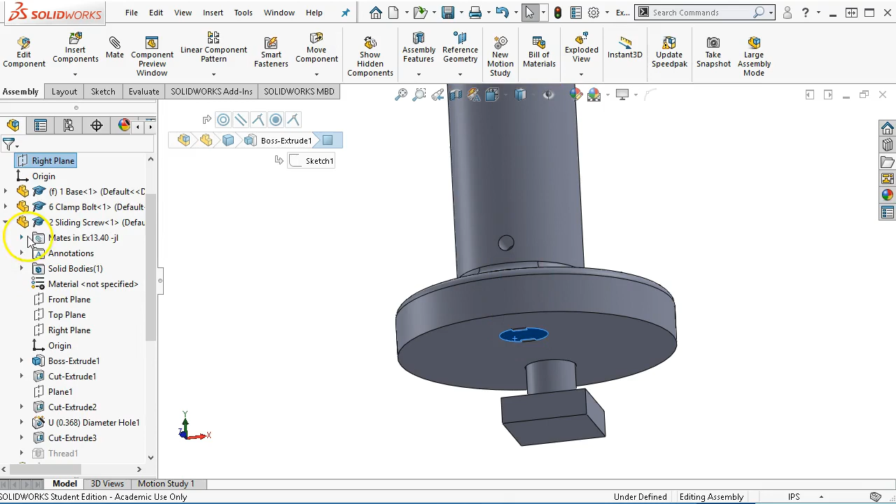Okay, continuing the mill jack. I did kind of see where this would come down and it would contact on the threads and wouldn't really come back any further. So one of the things that we could do, since we located for that geometry, is when I highlight the sliding screw and go back to the mates, there's a coincident.

If I right click and edit that feature, then the other mate would be to go to a distance, and we'll raise it up 1/8 of an inch. I'm going to go to the high side, rounding up. Notice that it went down, so I need to flip the dimension. I wouldn't want to reverse the mate alignment because that would turn the piece potentially upside down and conflict with some of the other mates.

So that puts it at the top of the part, so we could still drive that piece down, but the anvil isn't going to come any lower than the knurled nut. Okay, and I go ahead and hit OK. The piece that I forgot was that little pad, and so we need to look at a strategy to make it. The pad's going to line up and be clocked to the notch, so it's given as half an inch tall, 3/8 wide, and then no real depth called out specifically.

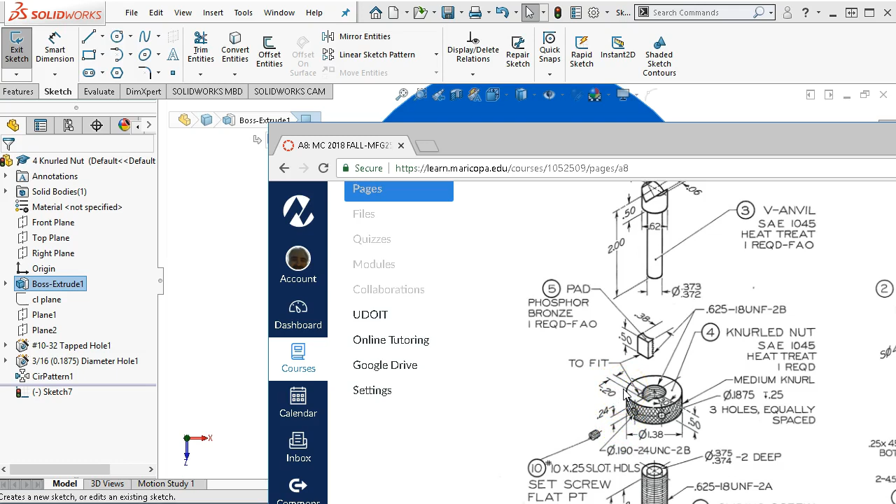What do we have there? 0.2. So they gave the 30 degrees off the horizontal. Yeah, 0.2 looks like the depth. And then they're going to say match or to fit. All right, so open up the sketch. Typically that midpoint is going to be coincident. Then select the midpoint of the rectangle, it'll be vertical. And then we're going to be 0.5 by 200 thousandths.

So the problem that I see with doing that is not knowing what they used as the reference. The threads that are going to engage on that pad, we're not going to have a lot of engagement left on that side. So we still have to get the threads in, and I'm still kind of wondering how I'd make that, getting the threads to line up. I know there's going to be some up and down float. It's not constrained that way. It's almost one of those where you would have to make a block and then EDM out the notch and have it pretty much fall out.

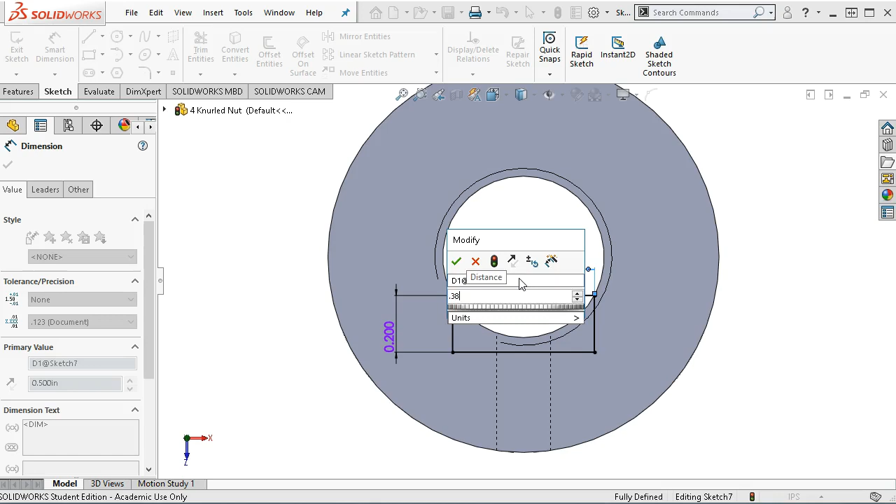So, oh, 1/8 inch, or sorry, the width was 0.38. The height was half an inch. Okay, so that makes sense. I'm going to extrude cut, and then go through all, and hit OK. Alright, so my cosmetic thread still lines up there. And we'll save. I'm going to wait for the knurl a little bit longer. Alright, let's see what we can do with the pad.

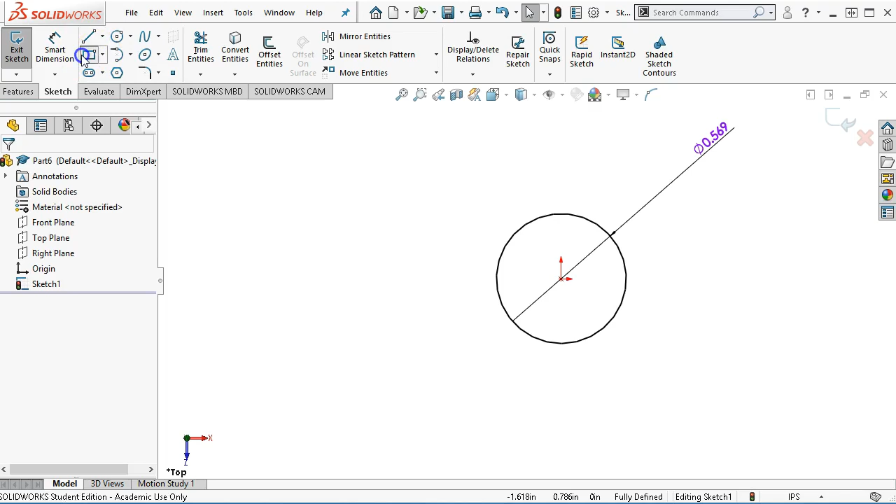We'll set up that geometry on the minor diameter. Okay, so on the top plane, open up the sketch. Let's just do the math again, minus 1 divided by 18, so the 0.569, that's my base circle. We brought the 200 thousandths out from that point. So I'm just going to generate the same type of geometry. Select the midpoint, make it vertical to the origin. 3/8 and 0.2.

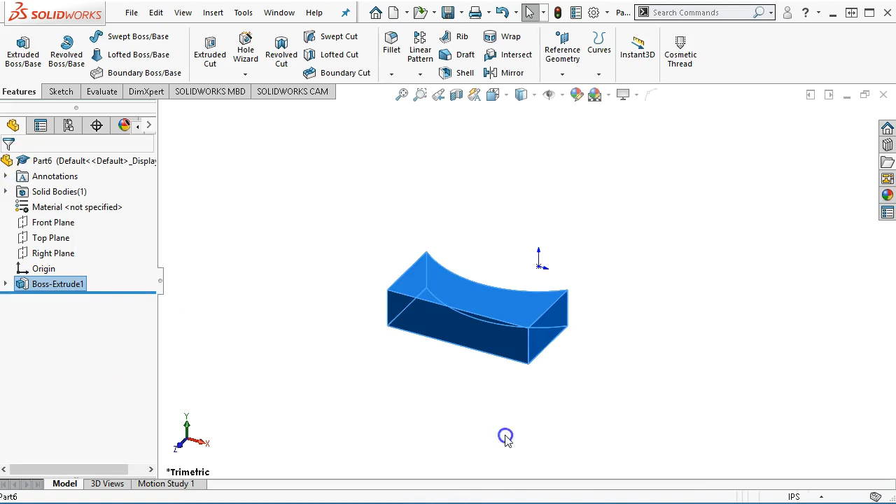Alright, so if we use that, I don't know if I can reproduce, oh, we jumped out of it. Let's go ahead and extrude. I'm just going to extrude that region. I don't really like leaving sketch 1 in there, so let me go ahead and get rid of that. Oh, and it was at 100 thousandths, so let's identify it and go 0.5 and rebuild. Okay. So if I go back and show that sketch, we're going to see if we can use that as the base circle of our helix.

So to make a swept cut, now the question would be, can I do a cosmetic thread on this? But I do want to see if it'll make the swept cut. In this case, I don't know that the threads would be an option. I don't know if the annotations are an option. So let's go ahead and go through this process, even though it's partial. All right. So to make a swept cut, we need a curve. We need the helix.

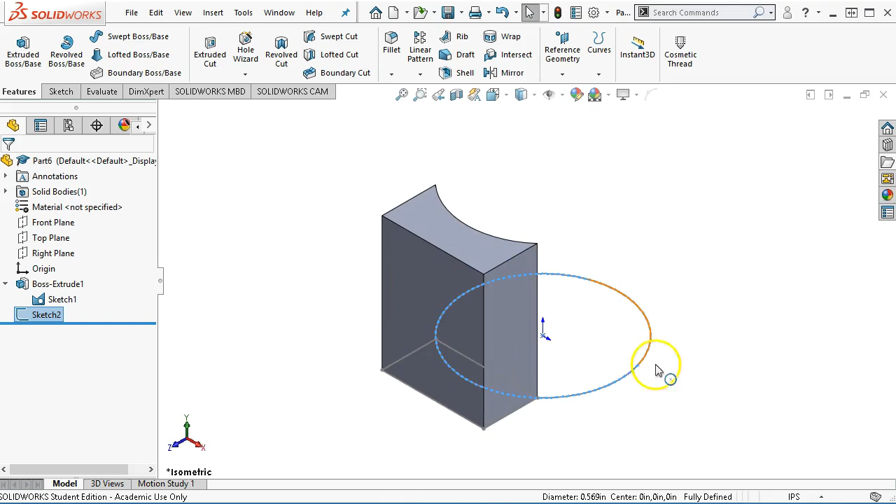And then since it's not a unique or a dedicated circle, we need to convert that geometry in. Alright, now it has its very own sketch. So sketch 2 will be the base of the helix and spiral for the curve. And we were doing 1 divided by 18 as the pitch, 0.055. And I don't really need to take it out that many.

I'm just going to go to 0.056 as a rounding, because that'll help a little bit with the angle. And so with the threaded cuts, number of revolutions, well, I don't really like that one. Let's go height and pitch.

Alright, so we have the pitch at 0.056, the height for one revolution, but let's go 0.5, and then we'll overrun it by 60 thousandths. So that'll make sure that it clears. And then the start angle at 0 degrees, we'll be able to pick that up and go ahead and accept.

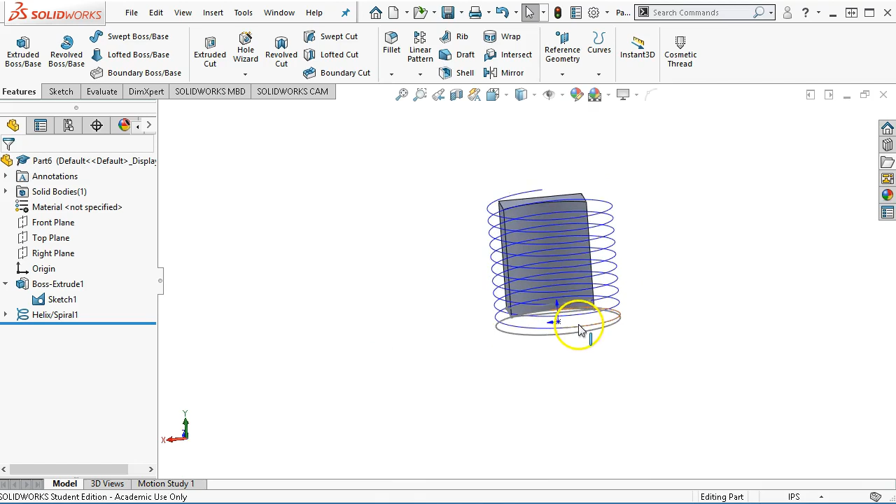Alright, so now the trick is to find 0 degrees. So it came back around and it's here, and that helps with it being internal to the geometry. So keep in mind that the wall has the curvature on it. Let's see if I can do the right plane. Okay, so on the right plane, we're going to create a triangle, 60 degrees sharp. That one horizontal and for construction.

Alright, and then our choices are to go to the top and pierce it to the curve, go to the middle and pierce it to the curve, or go to the bottom and pierce it to the curve. One of those will work, and by overrunning it, it really won't matter. My preference is going to be to pick the middle. And then that's the endpoint, so we get a coincident.

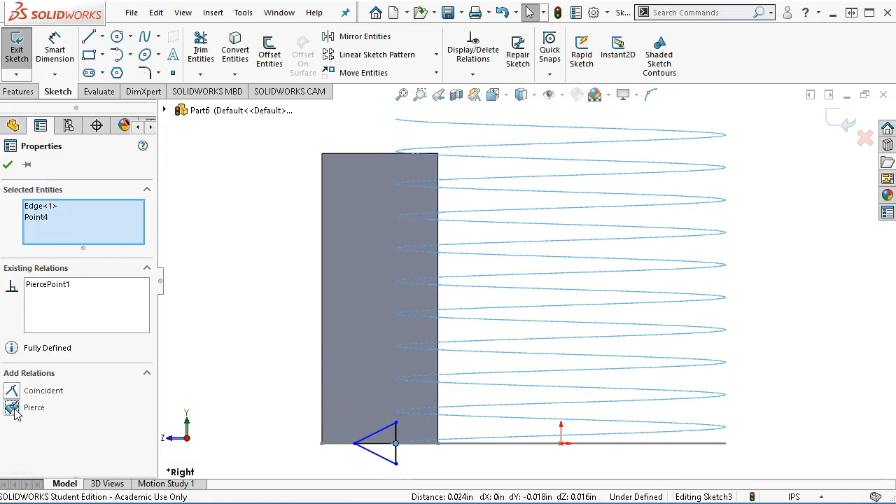But coincident typically will say that that point can ride anywhere on this curve. If we pick the curve and the point, then we go into pierce. Alright, so got it in position, going to give it the 60 degrees for the V, and then the height will be 0.055. I don't want it to overlap.

And let's see, what did I tell? Oh yeah. So pretty much the next V is going to be just a little bit of a gap from this V because we're at the midpoints. So let's go back and select. And then of course with the truncated threads and everything, we have just a little bit of a difference with the angle. Alright, so I just wanted to see what that value calculates out as.

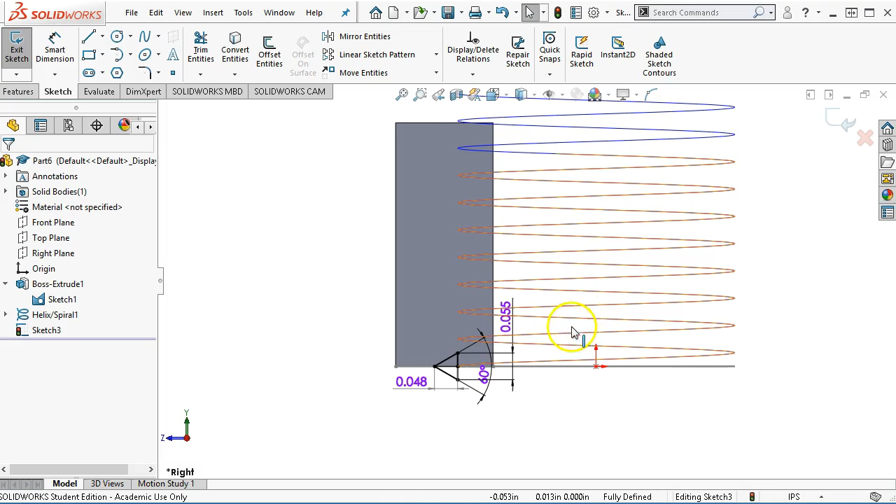So with the root radius and the crest and everything else, the threads get really interesting if we go to fully create that geometry. Alright, so we have a sketch that is the profile, our sharp V thread. We have a helix that is the path. And if I select both of those, then they become the swept cut. So it's going to remove the material going through the part.

And even though there's nothing out here to cut, there is something. I'm not sure what that is. That's a little concerning. Let's go ahead and accept it and see what it does. Interesting. So it chopped something out of the bottom, and some little notches. I haven't seen a swept cut do that. Alright, so we'll save that one for later. That's the technique. I will explore why exactly it did that.

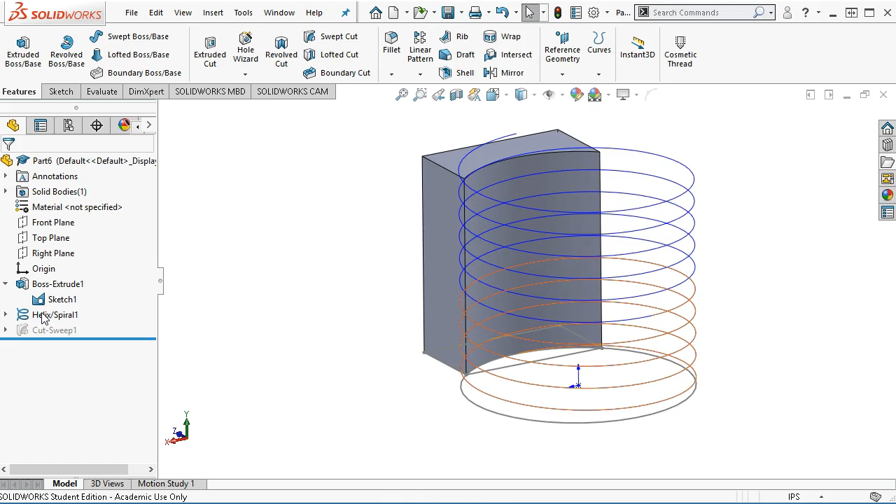I'm going to suppress it. We're going to hide the helix. And as the complex, we can hide our base sketch. Alright, and let's just see if it'll put the cosmetic thread on a curved edge, 5/8-18. And it has the geometry, so it shows there. We go to the one, not really there, not really there. So that's kind of interesting.

What that's going to do as far as the callout. So this was item 5, the pad. Alright, so at this point I think we could have just drawn that, and we'll put a note on the drawing, 5/8-18 thread, and then see what it does. Alright, so let's go over, I'm going to launch my File Explorer. There we go. And then we're going to go to the assignments.

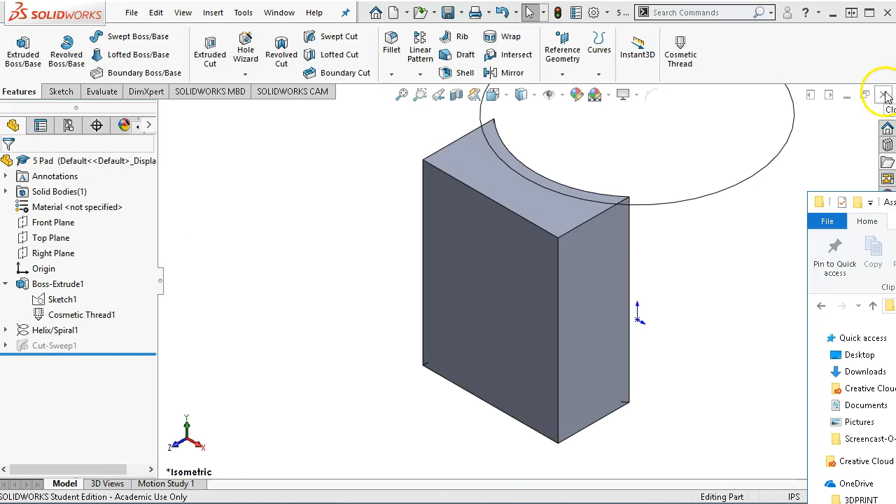Alright, so when I close this, there is number 5, the pad. We still have that open, but I think we're through with it for now. And it's saying the assembly has changed. So I'm going to rotate around to where I can see that notch, and then we're going to drag the pad in. And that produces kind of the same insert components as coming over to the SOLIDWORKS Explorer and picking those items out. Alright, so the annotations aren't being shown.

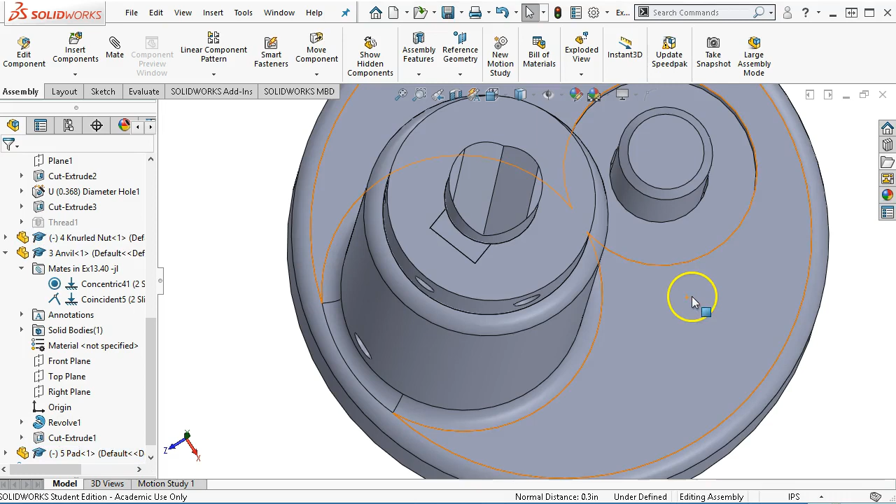So the other thing would be, I'd almost want to make this like 7/16 tall, because that gives it one thread higher or lower so that it wouldn't be in bind if we went to the trouble of making this. And so that's coincident. And I can see the top. And so I don't know how much mismatch they were really counting on for that piece, but I would think that I'd want maybe even half a pitch so it would not have to worry about alignment.

The other choice would just be to bring this to a higher class of fit, go to a 3B. I think maybe the 3B tap, or even as small as these parts are, cutting the threads to a 3A and a 3B fit so that you have that resistance in the turn would be about as easy as making this little pad piece. So that is certainly an option that we would put on the table.

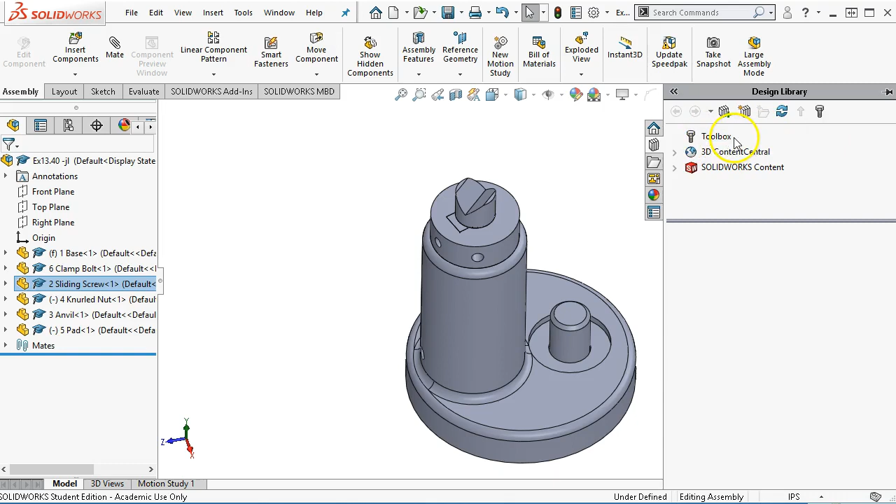Alright, so that takes care of the parts and the oversights. In our process of building parts and assemblies, we're always doing that error checking. It's kind of a continuing process of what did I overlook, what did I potentially miss. We're ready to go on to the toolbox. So I'm going in the library. Toolbox isn't active. Toolbox only works in the assembly.

So I'm going to go ahead and add it in now, which is the same as coming up to the options in the add-ins and telling it to load the toolbox. Once I do that, the design library is going to have all of these folders. Under ANSI inch, we're going to look for the washers first. Let's just go with plain type A, and we're looking for what would be an off-the-shelf. Preferred narrow, preferred wide. No, I'm just going to pick one.

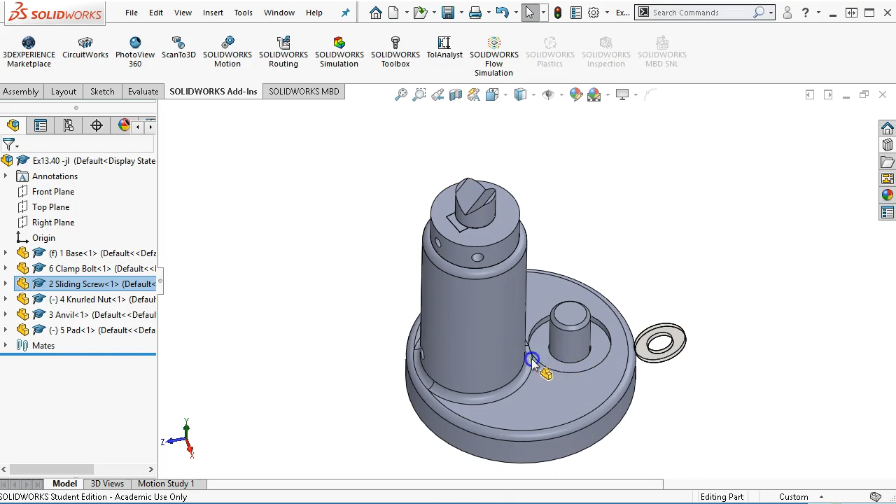So the first one, kind of dragging to that area. No matching size for the component. It shows it as a 5/8, which is fine. So this one is a little bit bigger. It did go to the 0.66, but it is really tight to that edge. So this would be a good time to fly the browser back in, and I'm going to go out to McMaster,

and we're going to look for washers, standard. Doesn't really need to be anything special, so standard flat washer, general purpose. Probably would stay with the 18-8 stainless as a pretty much generic all-around. Right, and then 5/8, 1.5 inches.

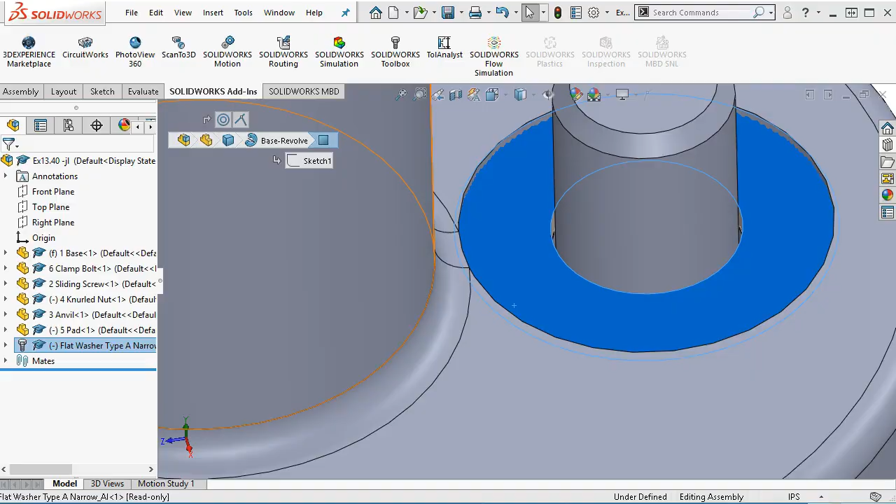So that may have been the purpose of them making their own washer, to reduce that size. A standard 3/16, 1.25 inches, that would probably fit a little bit better. And then 50 to 60 thousandths or 55 to 70 thousandths on thickness, and not rated on hardness. Alright, so that gives us a range. Let's Control Z, and then remove the washer, and go ahead and save one more time while I'm thinking about it.

So narrow flat. Let's see if that's going to be any closer. Nope. And then, let's see, that's a wide flat. Nope, not helping. So the narrow is probably the better bet, and the piece is not going to quite fit with our design. Okay, so that being the case, we're not exactly finding what we want.

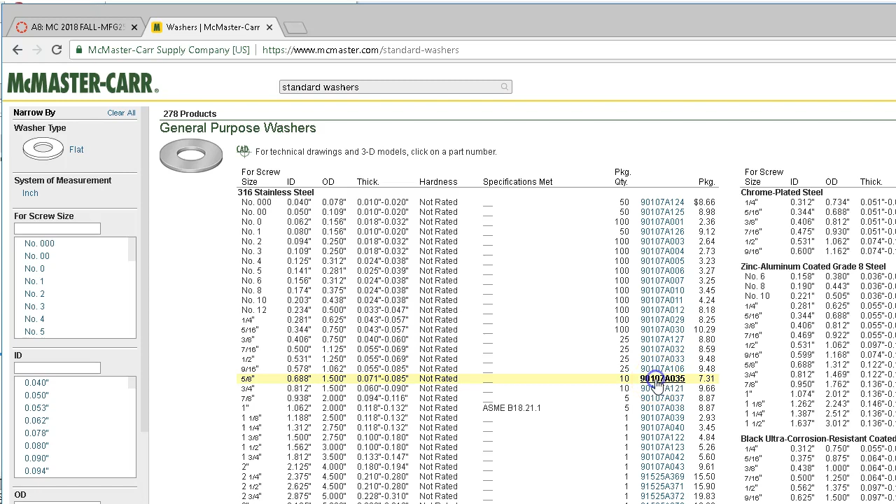The advantage to companies like McMaster and other suppliers is that if they provide you with a model, it's going to have their part number attached to it. It goes into your assembly. More than likely, you're going to order it from them. So, 70 cents a piece for the washer. I click on the part number, I go to its detail. We have the description. So that one did go up to 1.5 too. I thought I had the 1.25.

Oops, wrong one. Needed to hit back. See what I was not paying attention to. 316. No, they were both 1.5. I must have jumped down. Alright, so that gives us a choice. Since the other washer was pretty close, now all the 5/8 are looking like they're, well, there's a 5/16, but that's still an issue because we drew it at 1.282.

Alright, so going back into the model, let's see if we can fit 1.5 inches in there, since our supplier and most of the suppliers are going to have that standard size. Since I drew this in the base sketch, we'll come back and see what kind of problem this generates. So 1.5, let's get that out of the way so I'm looking at it. There we go. If we add the other 1/8, actually it needs a little bit of clearance, so let's see what it looks like at 1.53.

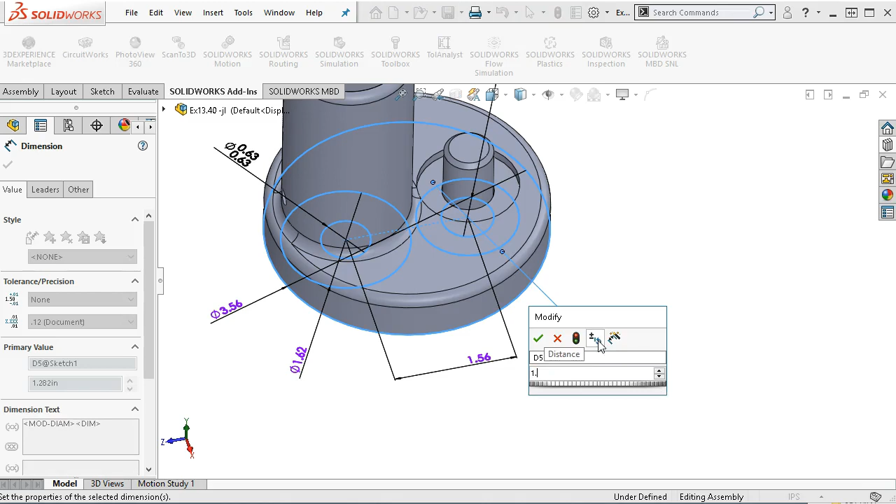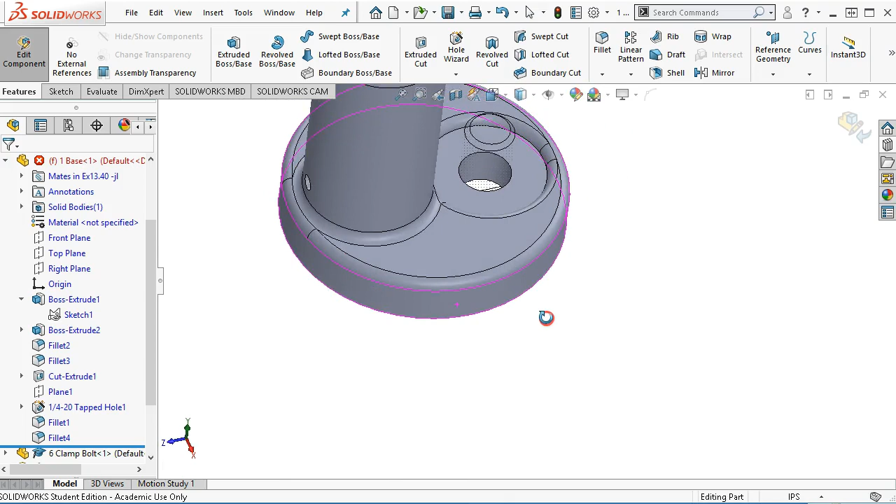And we'll see what that does to the fillet. Yeah, it's kind of what I suspected, the fillet was going to have some issues. If I edit the fillet from the assembly, I'm editing in context. I do want to be careful not to tie anything together that I don't want tied together. If it terminates at that point, then we'll see if that's okay. If the FeatureXpert can resolve it into 2, or something about that cylinder intersecting, though, that's a little weird. Yeah, I guess there is an overlap there then.

Alright, so I'm going to go ahead and edit the part, opening the part. Oh, I put the fillet all the way around. Nice. Yeah, that was not a desired result. So I'm going to go ahead and just delete the fillet out of there. We need to look at that base sketch. Alright, so bumping it up to 1.56 gives it an overlap, and that's cutting into the face, or the 1.53.

So if I go to 1.5, that could be a 0 thickness, which would be a problem. And we have enough room, and it depends on what we're changing here. If this is a new product, then I can make the change. If this is an existing product and we're reverse engineering or reproducing it for another production run, then I pretty much don't want to change that value, and I then have to decide if I'm going to make that washer at 1 1/4 to match up to the 1.28.

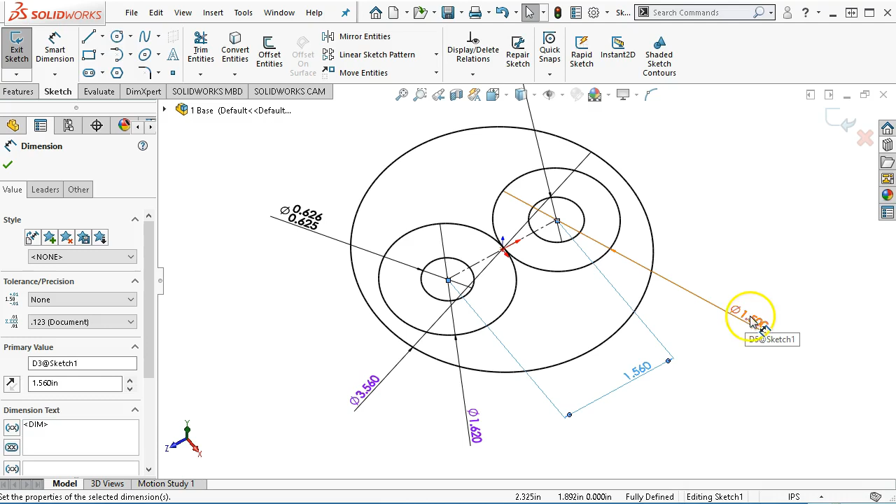Let's go ahead and see what it does. And then we'll hit close, and there's another fillet in there. So that one kind of comes around. Oh, it added fillets earlier in the mix. Alright, so I'm kind of okay with doing that. And then where was fillet 3? So I'm just going to edit the feature. Okay, so fillet 3 was along the edge. That was one that we didn't need. So that one just gets deleted.

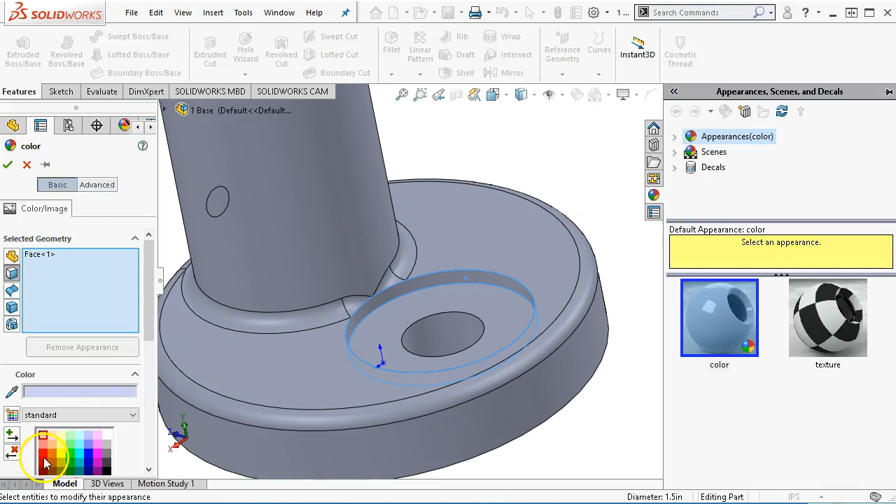Alright, so this is a design review item that I'm going to want to mark by the appearance. So we're just going to do the face. And I may not be able to see it as well in the assembly, but we are a little deeper than the other part.

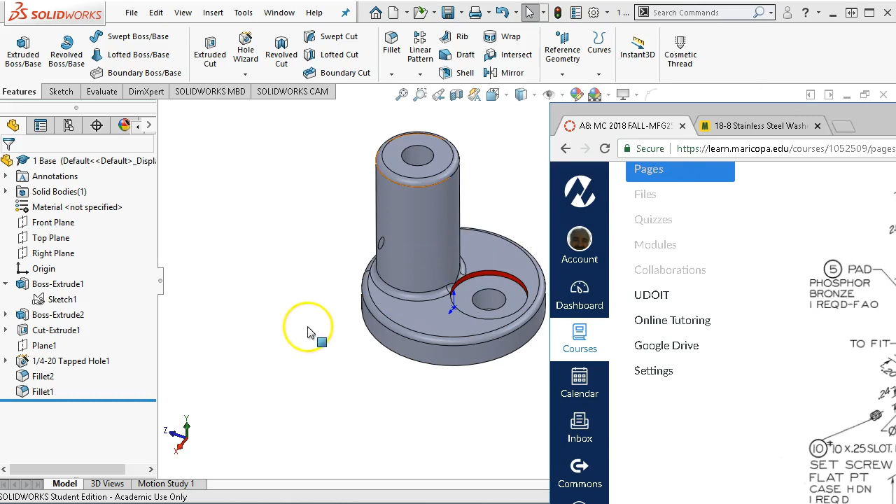Alright, so then what I was going to get at is if I could find the washer in the supplier, then clicking on that item. It doesn't matter, then the 18-8's fine. Clicking on that item, going to its detail, and then coming over, we can download the 3D SolidWorks, save that file, put it over into our working folder or into our design library, and be able to drag and drop it in just like we were doing the Toolbox items. Alright, so I can go ahead and close that.

And I'm going to leave the fillets a little weird. We're going to go back to the preferred, put that in place. It is 5/8. Oh, and we do end up with a little bit of clearance, so what did I tell it to do? Alright, so its size is 1.31. Alright, so that actually helps. The narrow was pretty good, so let's go back to the original sketch. And I am editing, making these changes outside of the... so 1 3/8. Problem here is still going to be that being undersized. Yeah, I don't think I want to do that. Oh, and then I put the wrong number in.

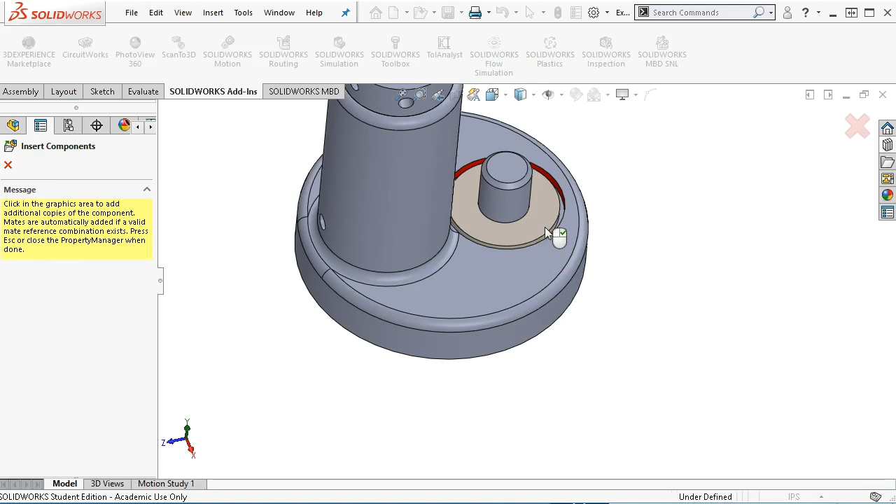Alright, so I don't want to do the narrow preferred because we're going to have to go look for it. It's not an easily obtainable item, so let's try again with the select. It's going to be for 5/8. And it wants to continue putting washers in. So that one's 1 3/8, that's a little bigger. Alright, and then that one was huge and that one was huge, so let's see, 1.5. Alright, so that being the case, let's go ahead and download.

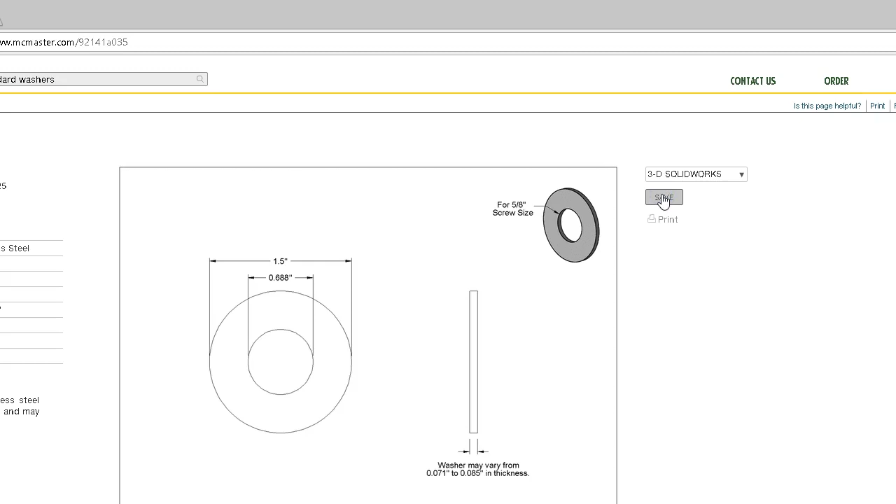Alright, so save the 3D SolidWorks file. It puts it over into my downloads. Oh, hopefully it put it in my downloads. Did it finish? Okay, there it goes. Apparently I didn't get it clicked. Let's expand out for the assignments. I'm going to drag it directly into Assign8. If this was a common part that we were going to work with, then I would probably add it to the design library. Alright, so I'm going to drag this in.

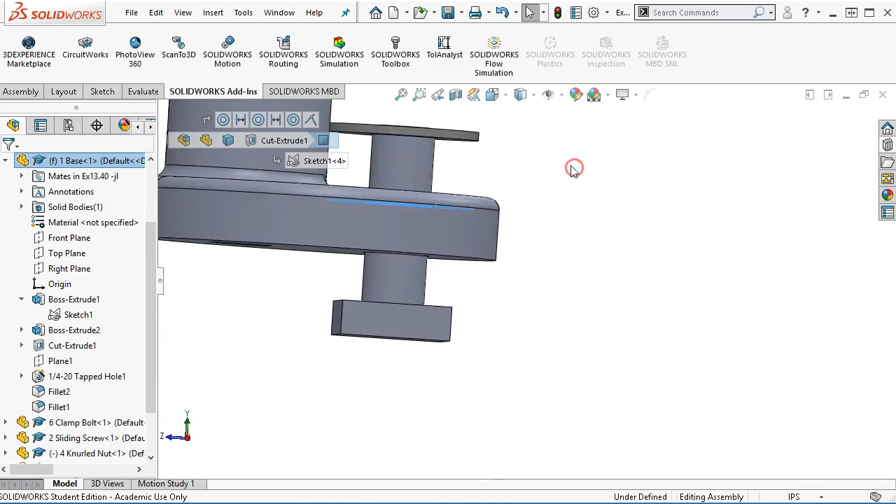Well, I don't have a mate reference, so we're going to go concentric, and then rotate over. So just kind of left click and hold down, move it out of my way, and then we'll go coincident. I really don't care if it rotates or not, but I'm going to go ahead with that concentric and right click, and it's only the concentrics that you can right click and tell it to lock the rotation. Alright. So that looks pretty good, maybe not perfect, but I still want to bring that up in design review that hey, there's an issue here, or who's our supplier, what are they going to be able to get us.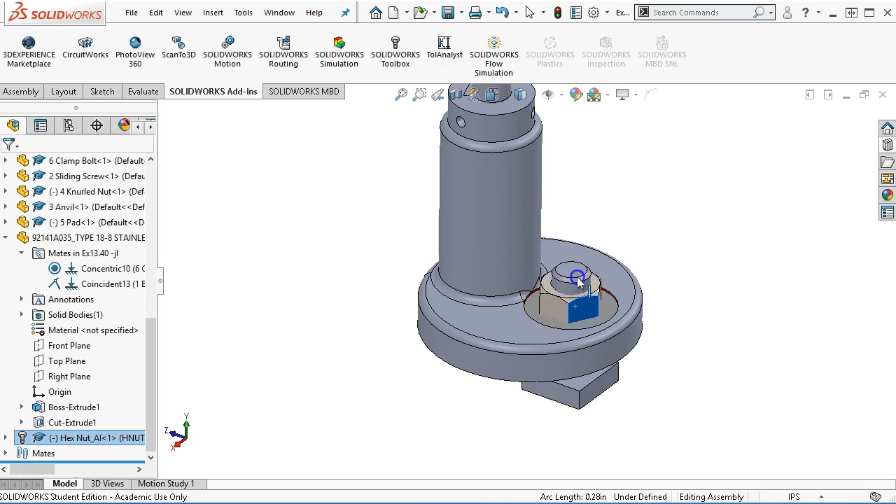Alright, going over to the nuts, it's going to be a hex nut because the machine screws aren't going to go that big. And then if we go with just a standard hex nut, drag it into place. This is a 5/8-11. Okay, so since it embedded itself, it didn't quite finish. Alright, so I didn't get the mate references. We'll go ahead and concentric. And then same thing.

And coincident. And then right now it's free to move. You can see it a little bit better with the hex, so we're just going to rotate it to a position. And all I'm really doing by going and finding the concentric mate and telling it to lock the rotation is that I'm losing the minus sign in front of it, so that I'm not thinking it's underdefined or if there's something else that needs to go in there.

Alright, so the two set screws. Now we're going to go to bolts and screws, and this was a slotted screw. So what were we called out as? Get back over here. And so one was just a flat point, and the other one was the dog point. So let's see what we have to work with. Alright, so there is the dog point screw. It's going to go in too. A little on the large side. Now it's a little on the small side. Scrolling down to the 1/4.

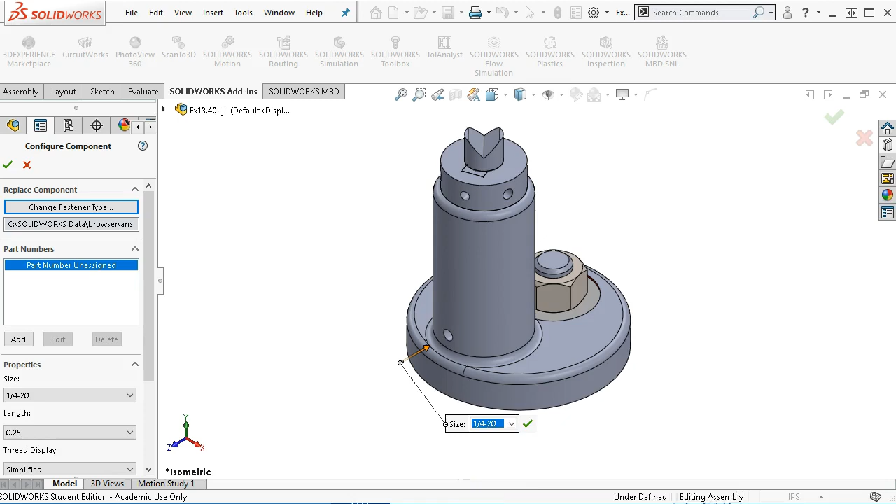Oh, I didn't set a length. So since I missed the length, I'm going to go back and edit the toolbox component. That's going to take me back into this mix. By 0.25. Well, that's showing it as 0.25. That wasn't much of a dog point. We have more than that to work with, so let's see what a 1/2 inch looks like.

Alright, so that sets me up for concentric. We have the slotting here, so I'm going to go find that flat. Pick the end face, we'll make that coincident, and then we'll see how much it sticks out. Alright, so it's not even close to sticking out at this stage. So one more, edit the toolbox component, and let's go up to 3/4 inch. And now it's sticking out a little too far.

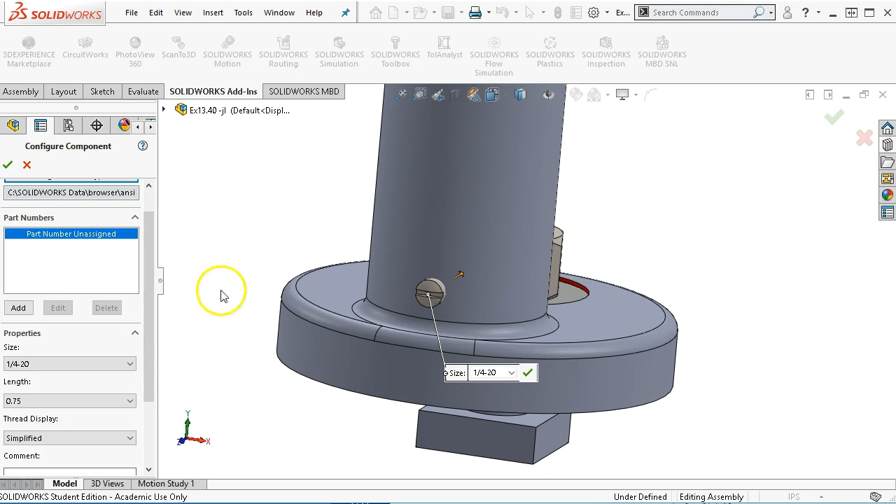Alright, so if this is just for alignment, it's not really stopping the screw moving up and down. The nut moving up and down on the screw really is going to position it. So this is more for alignment, so the screw's not turning the anvil and basically acting as anti-rotation. So I'm okay with that being a little sub-flush.

Alright, and then the flat point should be the one that goes through. It is lined up with the pad. So let's see what we can find. Slotted set screw, cup point. So cup point is a little relief. Half dog, there we go, flat point. Drag it in. That one was a number 10, so 10-32. And let's see what 7/16 looks like.

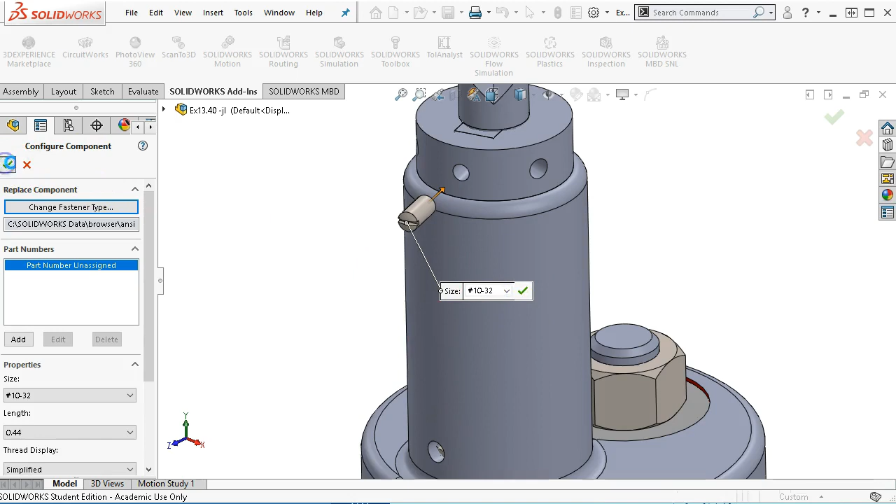Go ahead and accept and escape because I don't need to put any more of those in. Set the flat. Alright, so close it. So 7/16 was a little heavy on that one. Go back and edit the toolbox component. We'll go back to 5/16. So 5/16, that brings it out flush. Kind of like that. Doesn't need to be sub-flush. I would like to have the visibility. Alright, so we have that in place. I'm going to go ahead and save. That completes the assignment as far as our build.

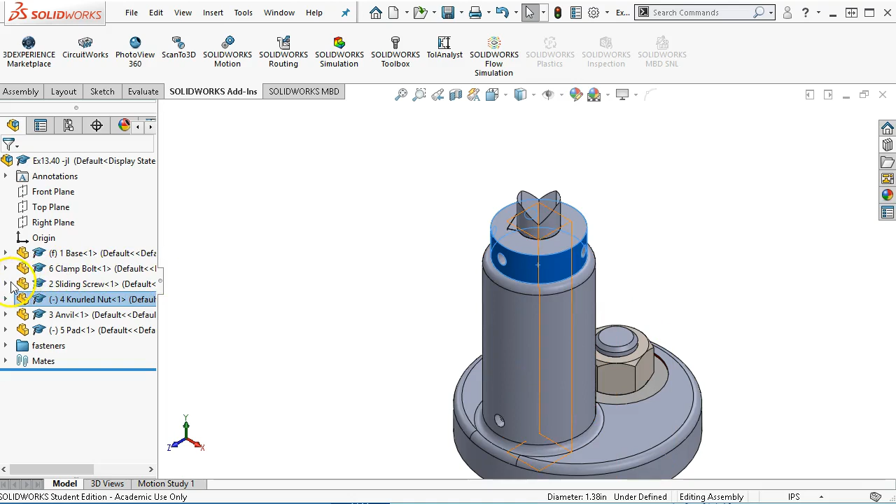If you want to go on, the optional is to build out, and we're going to try and put in a screw mate with this. So I'm going to pull these guys into a new folder. So add to new folder is just off screen. And so these are my fasteners, or hardware, or whatever you want to call them. The pad, okay, since that's able to turn, that's going to stay stationary. What is going to move is that we need to find that sliding screw mate that said that we had a distance, and I want to suppress that.

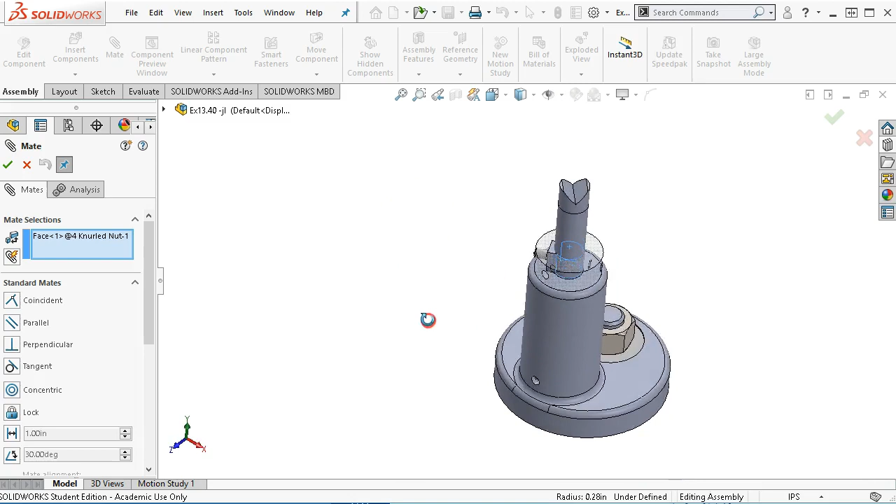So if it'll let me right click and suppress, then when we pull on the anvil, that will kind of line it up. And actually, if we pull it the other way, that will kind of line it up. Alright, so I need one. And we're back into the assembly. We're going to go into the mate. And then let's see if I can move this without selecting it. So that gets me a little higher up. Kind of what I wanted.

Alright, so that one is going to then switch over to the mechanical mates, and we're going to set for the screw. Revolutions per inch is a little bit easier, so we could do 18 revolutions per inch, or if we did distance per revolution, that would be our 0.055 or 0.056, whatever we lined it up to. And rotation is that when we are tightening it, let's see, where is that set?

Reverse. I think we want it to be tightening as it goes in. If we're turning this, it goes, well, we're going to see. Alright, so let's go ahead and hit OK. And then as I turn this, okay, as I push this down, we're going to see that turn. And then as we move it back and forth, we're going to see it go in and out.

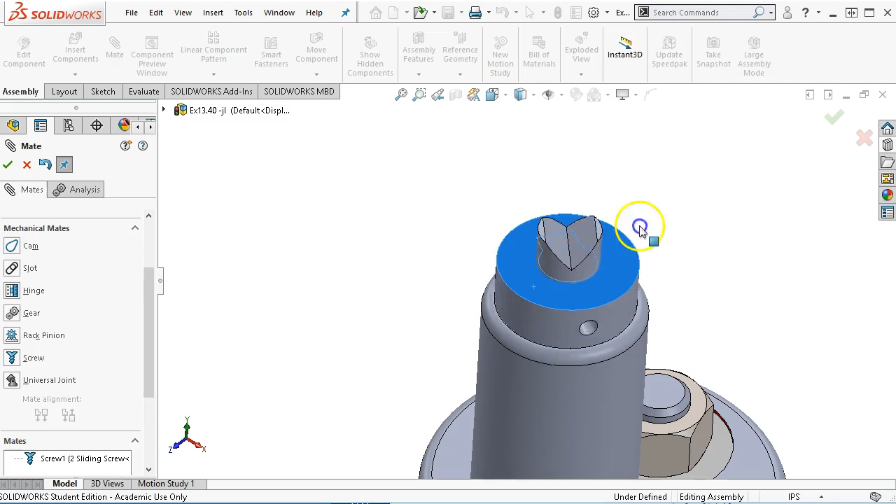The problem here is that it really can just keep driving through the part, and if I keep going, it will end up contacting somewhere. So I think this was a pretty good bet. We had 2 inches on the alignment, which we didn't use all of it. So really, we only have 1 inch of travel before it comes off of the piece, and then also 1 1/8 on the thread length. So yeah, it's gonna about do it.

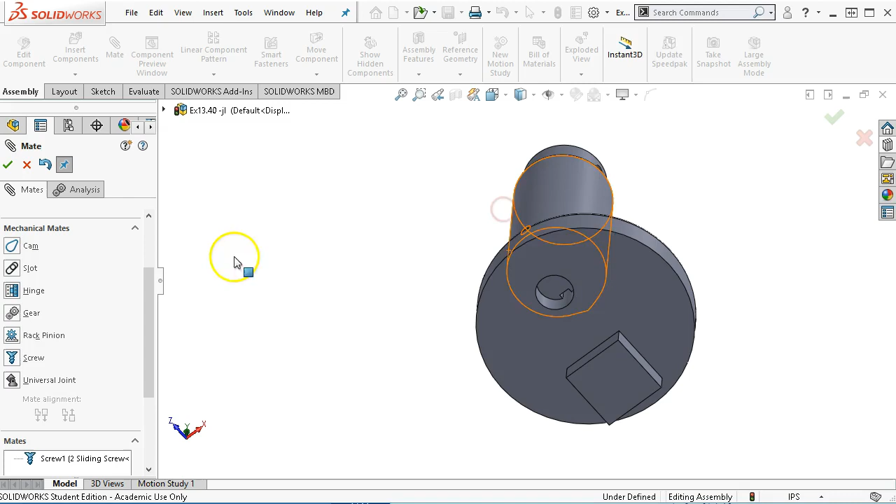We want it to contact the bottom of the nut and then not be able to turn, and then from there you're lifting it out anyway. So what I'm doing is I'm setting up the mate for the advanced mate that is going to be a limit distance. Alright, so from 1 inch, when I pick the 2 faces, high end is 1 inch, and that's pretty much going to take it practically off the part, but for our purposes that'll be fine. The minimum then will be 0.13.

Right, and then the check is going to be that I move this up and down, the nut turns. And the nut is able to turn, but it stops after it's made so many rotations and driven the part up. So if I'm screwing this in, then as far as visibility, if we're turning the thread that way, it's bringing it in.

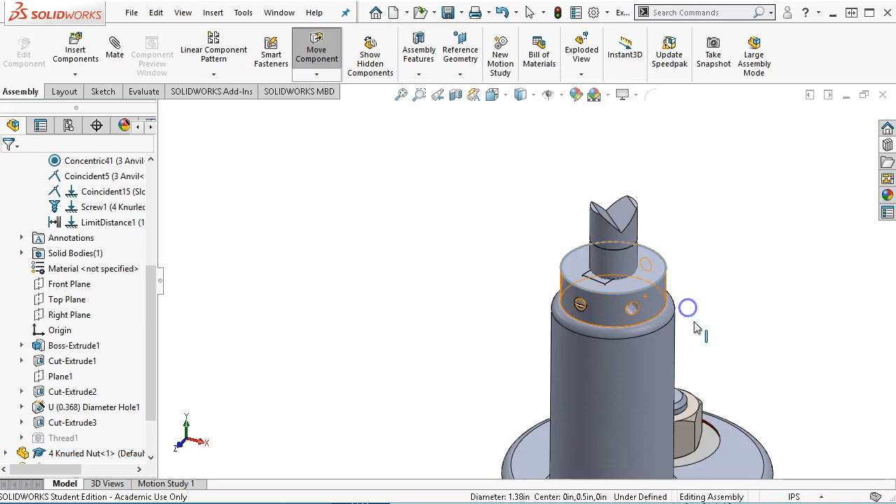Okay, I'm having a hard time visualizing that this morning, so I know if I was turning this, this would be going in, so we're turning opposite of the way that I would turn this to drive it in. I think that's correct. Okay, gonna have to ponder that a little bit. Alright, so if we want to make knurls, let's go ahead and save this, because if I crash the computer, then we're going to call it done.

Alright, so knurls can be made with the swept, but usually I end up deforming them just a little bit, which is not as desirable. So I'm going to find the right plane. I'm going to open up the sketch, and I'm going to produce a center line from the center to the midpoint, and then we're going to put an angle on it, about 60 degrees. Right, so from midpoint to midpoint.

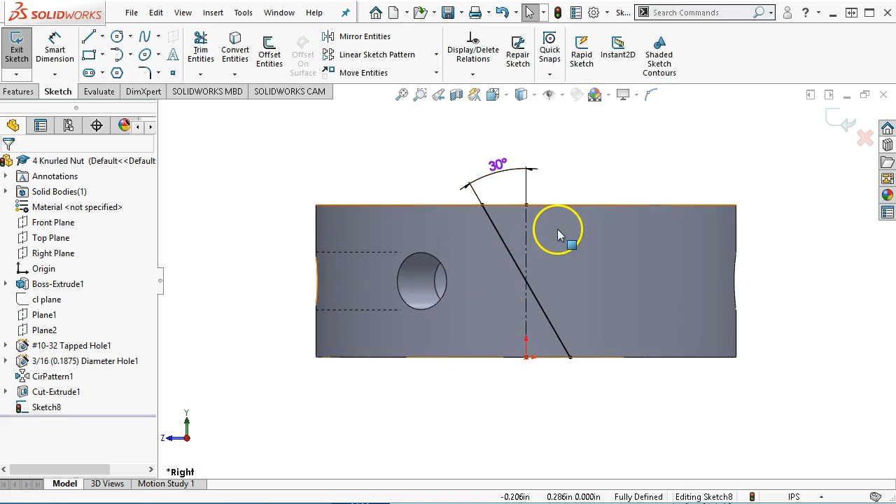Set our angle. So 30 on the included. Yeah, 60 would flatten out quite a bit, so 60 on the interior. Okay. So then we want to create a curve, and I did click on Save Document. No? Alright, so let's go ahead and hit Control S in case. Do not have the curve up there. We're on Features, and then this is going to be a projected curve.

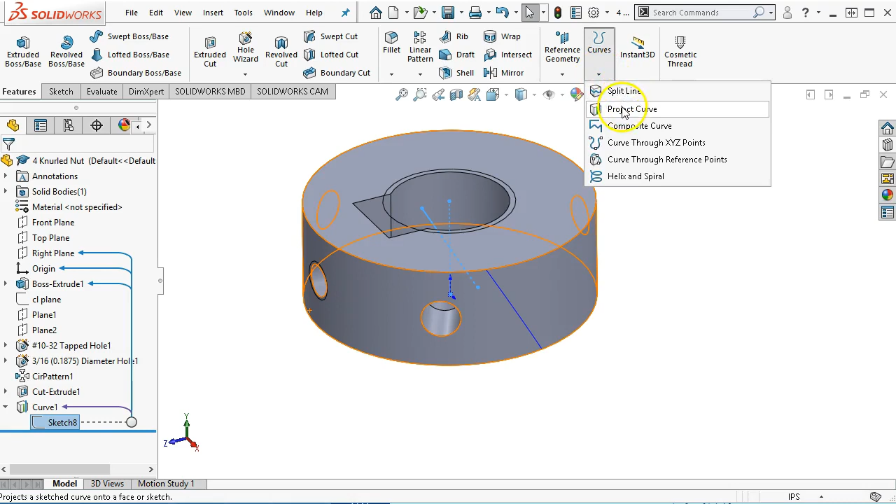Do not want it to be a split line, so I need to get out of the sketch. And then that will open up to where I can do a projected curve. And it's going to be on faces. So we're going to get one direction. I don't know that it's going to let me share it. Let's see if it'll let me do a second curve with it. Probably not. Oh, maybe.

Alright, and then if I bring it the other way, then when I come around, this will be facing the opposite way. Alright, so I don't know that I need both of those, but we're going to check it out. Alright, so for my direction then, from the center, let me have the line. Alright, so we'll wait for it. We'll bring it out, and then I'm going to pierce the curve. So selecting the endpoint, selecting the curve. I'll set that as a pierce.

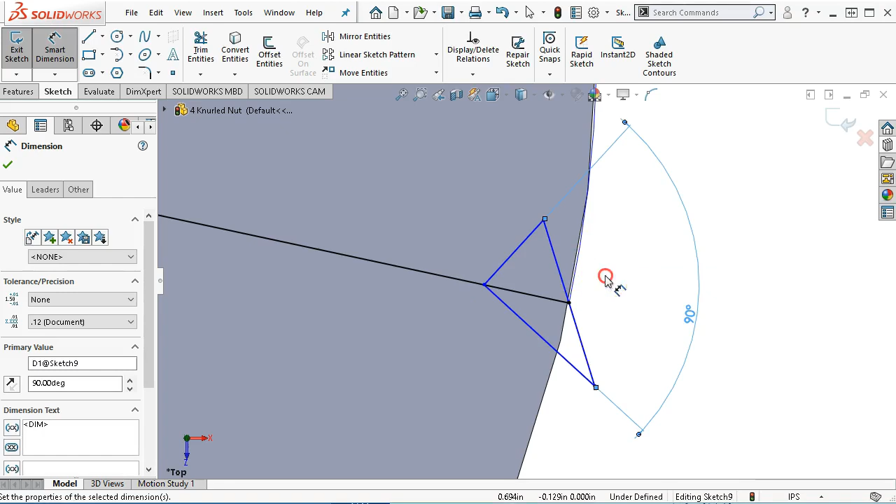And then I want my diamond shape, which I'm just going to use pretty much the same technique as the thread. So that'll go to the midpoint. Except let's stay with a 90 degree this time. Alright, so that's going to be perpendicular. And then I will make that over to construction geometry. And then let's see, for width, now that seems a little big, but let's see what 0.080 looks like. Okay, so that gives us our geometry.

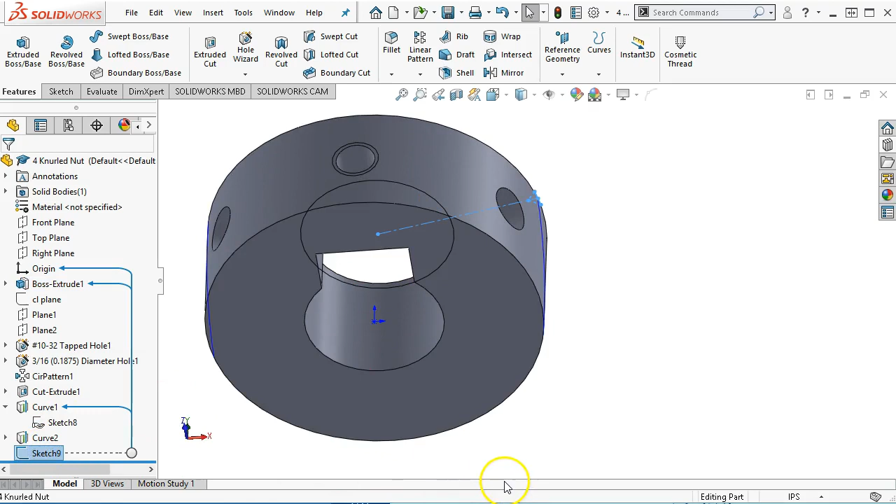I'm going to make sure Sketch 9 is highlighted, hit Control C, and then we're going to do Control V. Duplicate it and copy it to the clipboard. Control C on the keyboard. And select the face. Control V on the face. There we go. Alright, so normal to sketch. Oh, I added sketch 10. I'll go normal to. We're going to see how this drives.

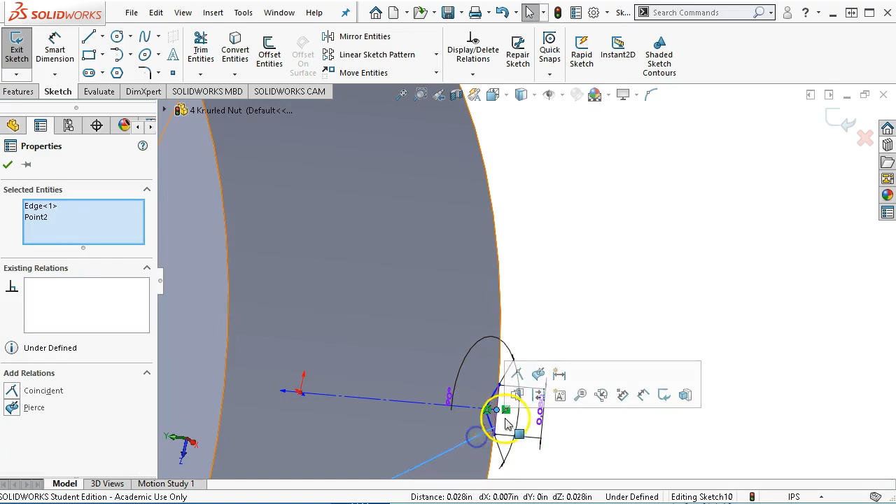I don't care particularly which side I go coincident to. We're going to go back to the center, bring it around, and get it pretty close. So the end point pierces the curve again, and then hopefully this will loft along that curve and make our geometry. So this is going to be a lofted cut. The two profiles are 9 and 10, and then the guide curve is the curve that we use for our geometry.

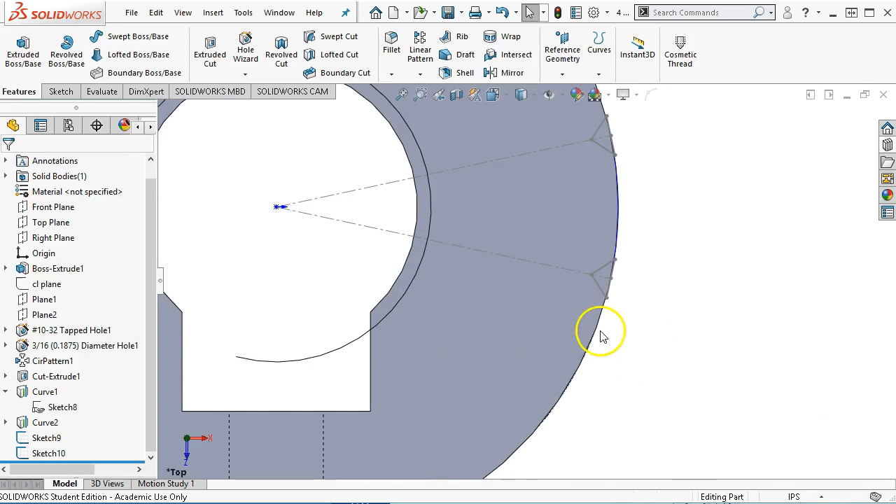It has the cut, and then it thinks it's doing bodies, so it left a little sliver there, which is not uncommon. And so since I see the solid bodies, or which bodies to keep, we could always go back with direct editing and remove it, but I'd rather just go ahead and complete out the sketch, and we'll bring that over and that back and just give it some additional distance.

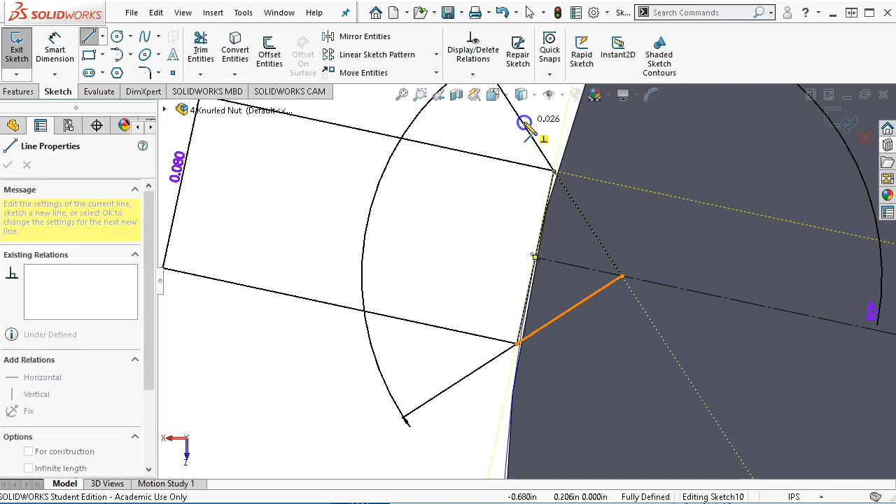Point 1 is way plenty, and then this becomes the construction line. Alright, so that's going to get me out a little further, basically making sure that I have enough to overrun the entire cut. Make sure it's coming out. I don't really care about the perpendiculars. And we'll go to point 1 again.

Yeah, did not quite get those parallels, so whatever it did for perpendicular, Control Z, and we'll just make sure that it's parallel to the line, and that will get away from the angle. Select, and then that goes for construction.

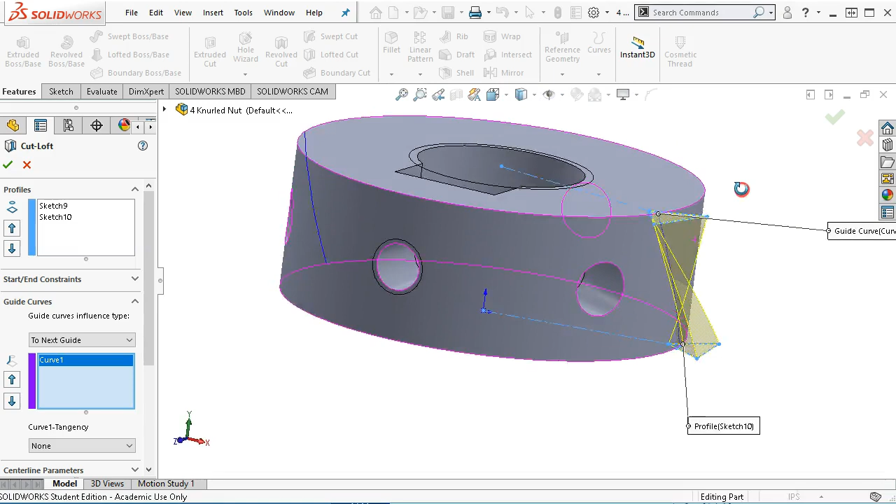Alright, so sketch 9 and 10 for the lofted cut, and then the guide curve is controlling. It is not necessarily just like the sketch. It's got a pretty good twist. Still trying to connect. Alright, so let's get rid of the guide curve at least initially. And it's going from point to point, so that would be that cut. It's the first time I've seen the handles do a better job than a guide curve.

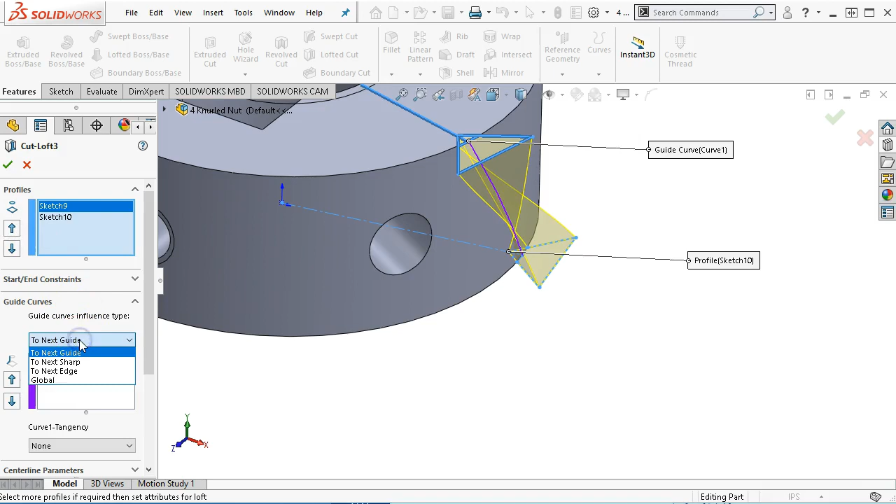Okay, one more check of the guide curve. Pretty sure. No, it's trying to twist it around. So I'm twisting it a little bit. Interesting. Alright, so we'll clear the selections, we'll let it stay. Alright, so for the guide curve, we can either reproduce the geometry over on the second curve. I'm going to hide that, and we'll hide both curves.

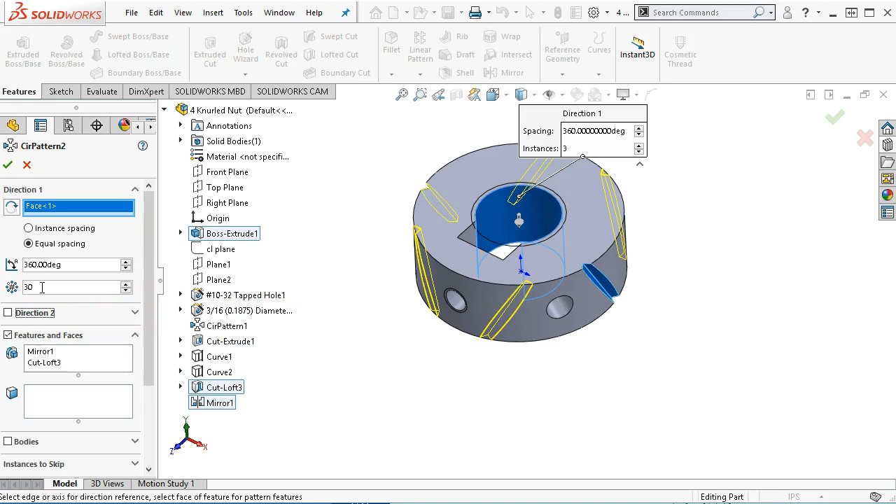Alright, so the cut loft is going to mirror across the right plane. And we'll see what this ends up looking like. So the mirror and the cut then become part of a circular pattern, and the intent is to have these crisscross. And so it's going to pick up the face. And then 3, we're not really going to see anything. 30 is going to be a little more complex. And actually, well, we're going to go ahead and accept it because I think if I get too many, my video card is going to freak out.

Alright, so it didn't quite come to a complete diamond. If I kept adding, then we would get it. Let's see if I can find the number. Maybe we'll go up to, there's my instance count. So 36, and then to 42 would be increments. And not responding, that's a little scary. Alright, so let's just go up to 36 so it doesn't take forever to do this, and then we'll rebuild. And we're going to see that diamond shrink to a little more of a point.

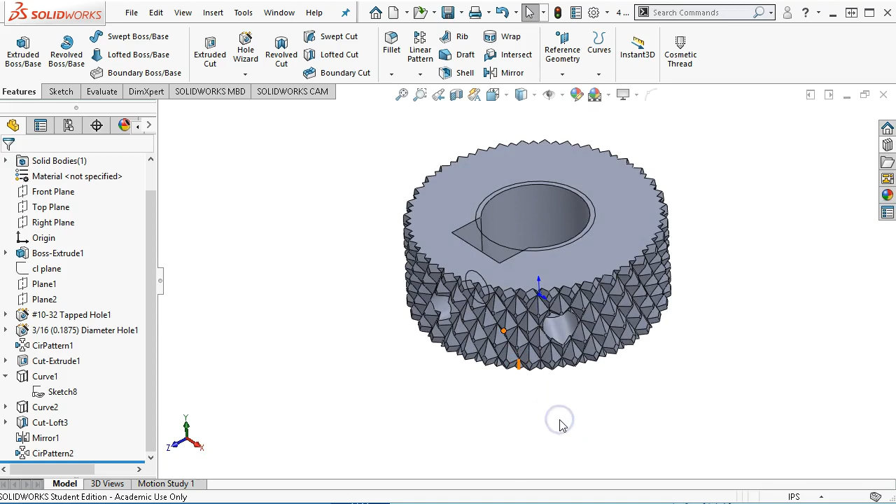And so the knurled knobs that I've 3D printed, this is the technique that I've used and had pretty good results with. Alright, so it's not to a sharp point, but we have just a little diamond on the end, and that looks pretty good. Alright, so again, this is optional. It does add a little bit of flair when we go back into the part. It is kind of impressive to see that knurl, so if it's helpful, then go ahead and do it. Also with the threads, if we don't see it on anything else, we'll see it on the part, and so it has a little more visual appeal.

Alright, so this is the point where I usually remember to start to put in materials. I'm going to fly this over a little bit so I can see. And so they have this as the anvil is a 1045. So we're going to edit the material. Yeah, 1020, so they do have a 1045. And then the phosphor bronze on the pad.

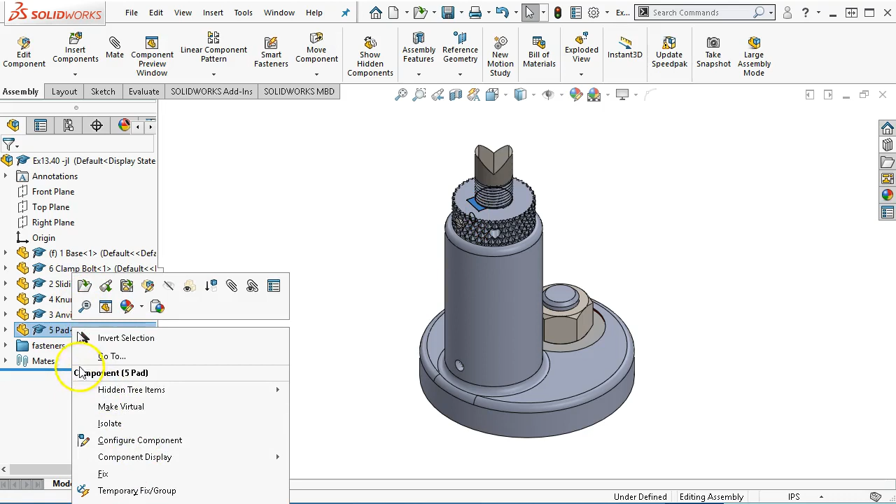So basically, expand out, make sure we can see the properties. We'll edit the material. I'm reasonably sure that phosphor bronze is not in my favorites. So put it that way. The knurl was also a 1045. So if I was adding a lot of 1045, I would go ahead and include it. And we're seeing a little bit of change in colors as they go. The sliding screw then was also 1045.

Alright, so in that case, let's manage the favorites. Let's see, not doing very much forever. Well, we'll leave it. SolidWorks materials, copper alloy, no, wasn't it? Was steel. We're going to go add to favorites, and then I can close. And now when I pick, I'll see it at the very bottom of the list. It'll get applied.

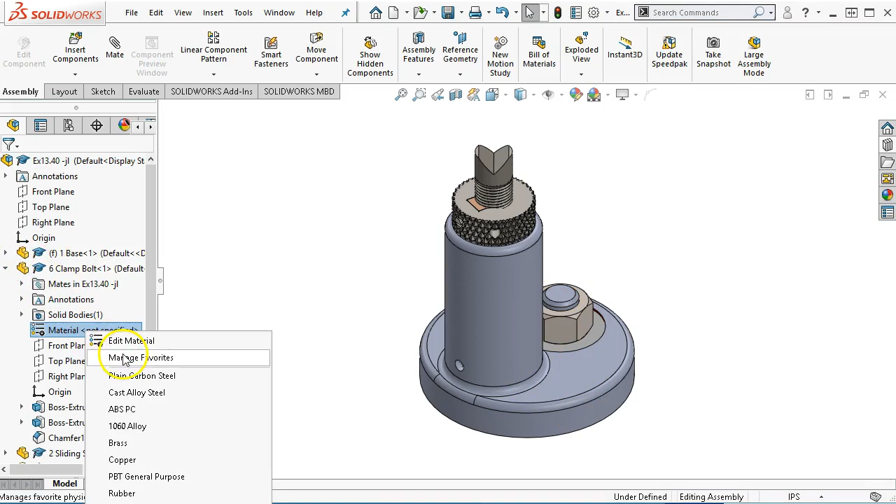The clamp bolt then was just regular 1020, and of course it wasn't in my list. So edit materials, 1020 steel, cold rolled, and then at last the base was just the clamp bolt base, is just a plain carbon steel. Alright, so since it's a cast or a manufactured, then we'll have it in the mix. Alright, so save.

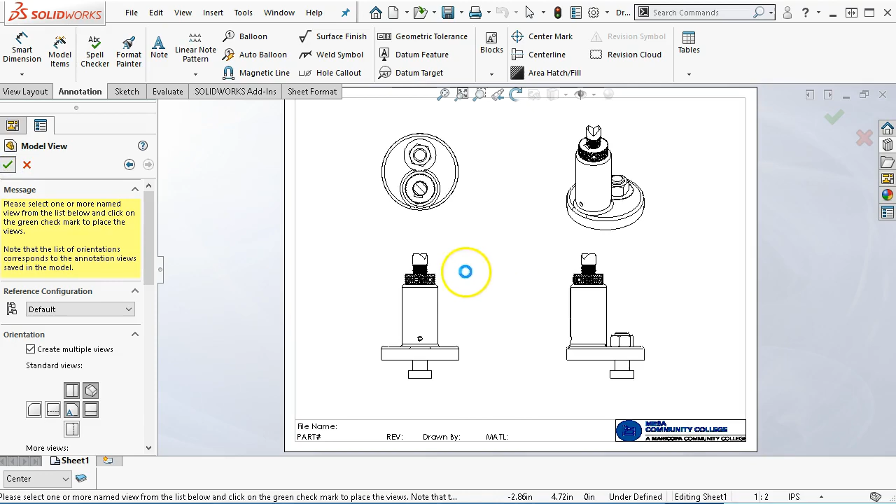So my process, we're going to create multiple views. Don't know that I need all of those, but we're going to be able to take a look at them. Alright, so at this point I'm still having that video issue. I don't remember exactly how I resolved or if I resolved. So there it's seeing all the edges. There it comes back. I would like to see those edges in the models though. So we do use parent style, and then that brings it in. So it's just a matter of the radiuses and how much. And that went away again. Okay, close enough. I'm pretty sure there's a setting for that. I've got to go ahead and chase that down.

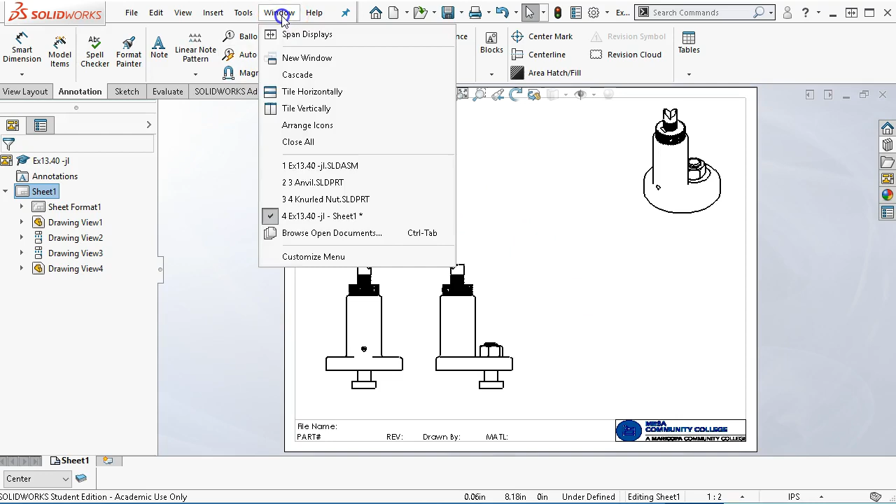Alright, so we don't need the anvil drawing. We don't need the knurled nut. Also, we might suppress the knurled nut if it stays complicated. I'm going to go back in, and now we're ready to do the exploded view. Alright, so I can come up to the command manager and go into exploded view, or we can come over to configurations. When I right click and say new exploded view on a configuration, then that will give me the steps. I'm going to go ahead and try to do the auto spacing.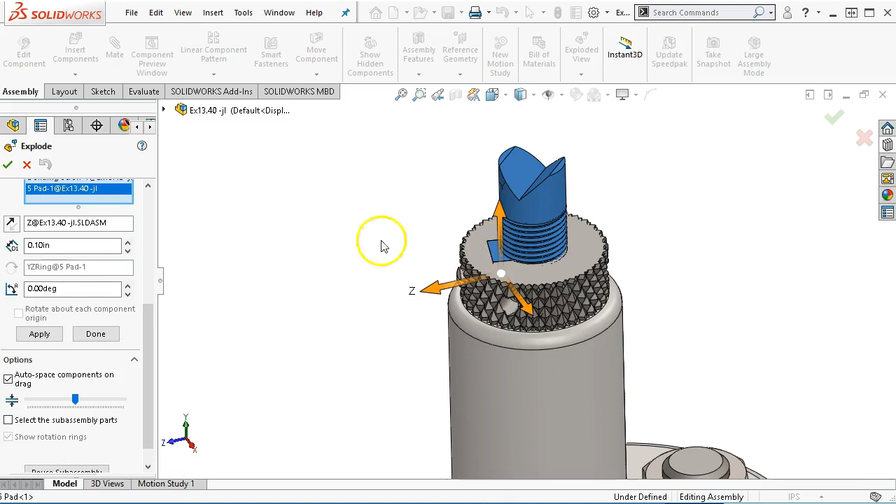And so when we pick, we're going to have 1 and 2. And this could get a little ugly with all this geometry. Alright, so those are the 3 pieces that are moving with the auto spacing. And it comes out, and then I can move them back a little bit closer. And there's the set screw, and actually the pad didn't do anything even though it moved with. But I think that's fine. I don't know that I have to have that come all the way out. And I don't think I wanted to accept that just yet.

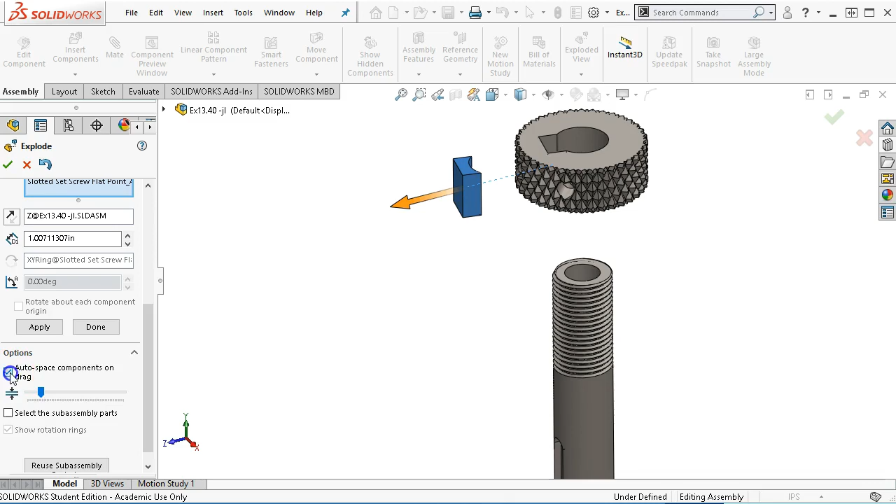Alright, so we're going to go back in and edit the feature, highlighting the view. Let's go ahead and bring the set screw and the pad out a little ways, and so just dragging on Z. Oh, it didn't really need to auto space those guys, so I'll go back and just uncheck that. Come out some distance. Alright, so watch out for the orbits, because anytime you see the arcs, it's going to allow it to rotate. Okay, so I'm done with that one. I do want to auto space the nut and the washer. Okay, give it a second to catch up. Apply. Done.

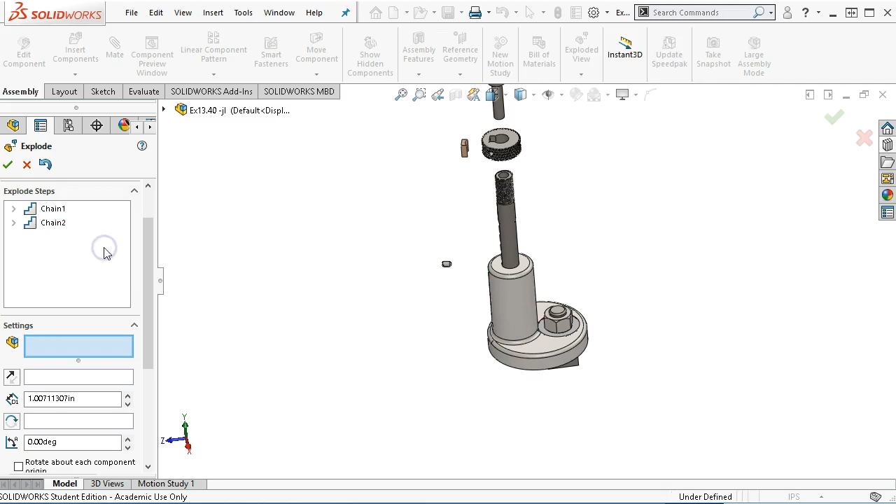Alright, so making sure that those are cleared. And then we'll auto space. Oh, I grabbed the nut somewhere. Oh, it took the nut with it on the other one. Nice. So explode step 1. Yeah, that wasn't the desired result. I think I'm going to go ahead and just delete that one, since I got out of sequence on it. Pick that and the washer. We're dragging up in Y. And then we'll go ahead and grab the clamp bolt, and it can come down in Y.

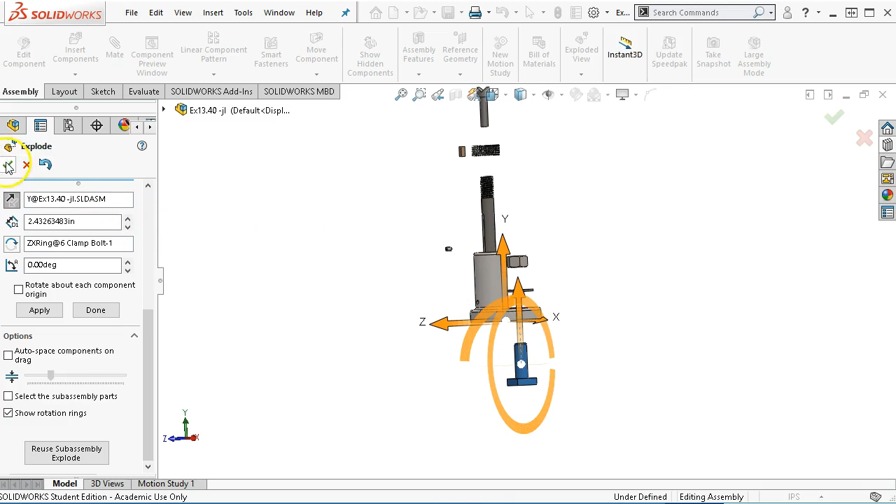Now there's no auto spacing on that one. No. Let's go back and double click, and I want to increase the spacing on that one and tell it that it's done. We'll go back into chain 4, and it really didn't need the auto spacing, so we'll go ahead and accept. Alright, so that gives me an exploded view. It's pretty visible. When I want to collapse, we're going to right click and collapse. That puts it back in. Now when I save it and go back into my drawing, I'm going to copy. So Control C, the isometric view, Control V. When I highlight, we're going to see the box now because there is an exploded state that it can select.

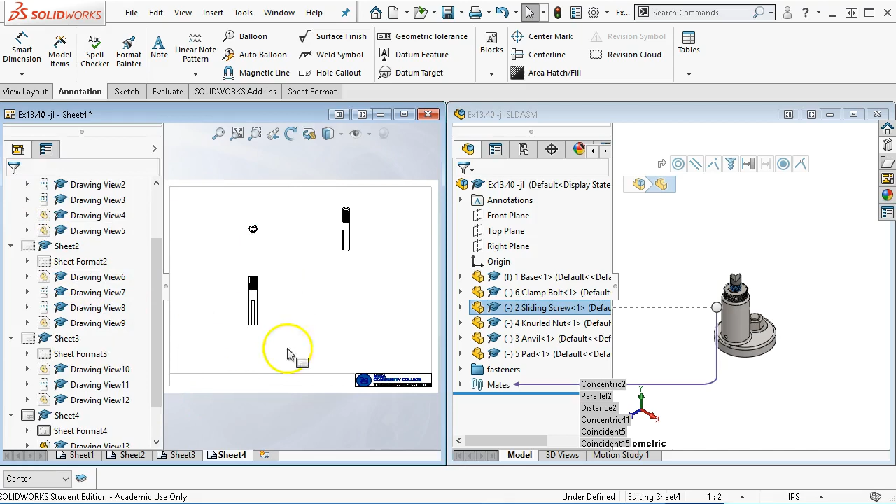Alright. So creating my additional sheets. I'm going to tile vertically. And we're going to go back to the... And so I can pull in for the base. And we're creating multiple views. And again, I don't know that I need all of those, but I'm going to go ahead and generate them. And then the clamp bolt. Pretty sure on the clamp bolt I just need the front and the top. Okay, and that gives me enough description. The sliding screw, probably the same thing, the top and the front, unless I rotate. If I rotate, I'll add it in as a projected view later. And then the next sheet will be the knurled nut.

And let's keep going with that, mainly because the side view isn't helping me with these, at least not much. I might do an auxiliary view, but I don't know that that's very beneficial either. Okay, so bring in the pad. It's going to be like 10 times the size to be visible, but that gets all of the drawing information input, and now we can go back and decide bill of materials, callouts, dimensions.

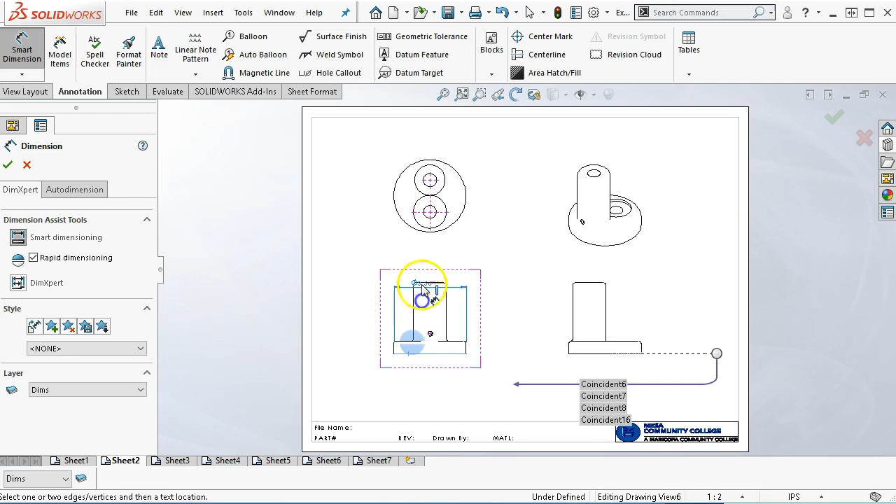I brought in my center lines, so now I would switch over to dimensions, and then we could start going through and putting in a dimension from there to there. Also, we want to go to the entire model on the model items and then marked for drawing, then there is my dimension, although I would have preferred it was up there. So let's see if we delete that and I go back and I pick the view and go to model items, entire model, import, no, just that one.

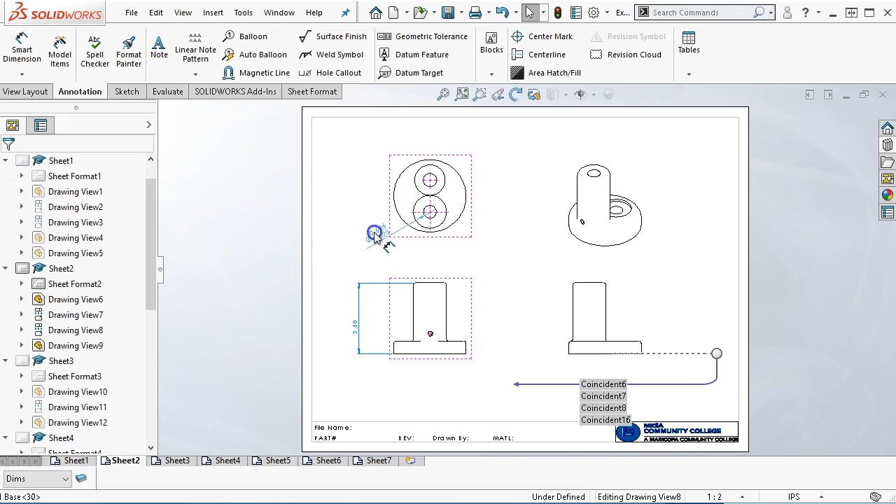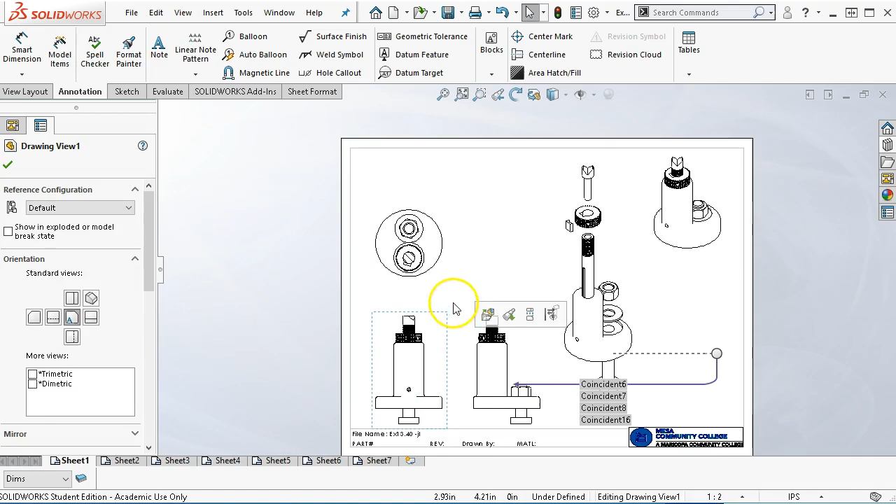So at this point, it's ready to go through and dimension. I don't want to spend too much time on that. Why don't we go ahead and just drop in a bill of materials real quick. I can position these. This is going to get kind of busy. I don't know that I would include all 3 views in the isometric exploded view. So we're going to go to tables, and under tables, then we're going to have bill of materials. When bill of materials pops up, we have quite a few options. We're just going to stay with the defaults for now. And then I'm going to place that one in position, see how big it is.

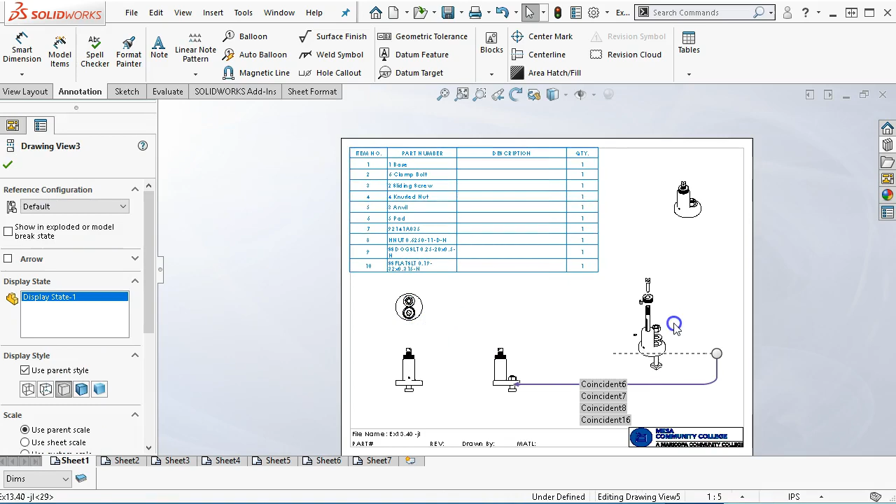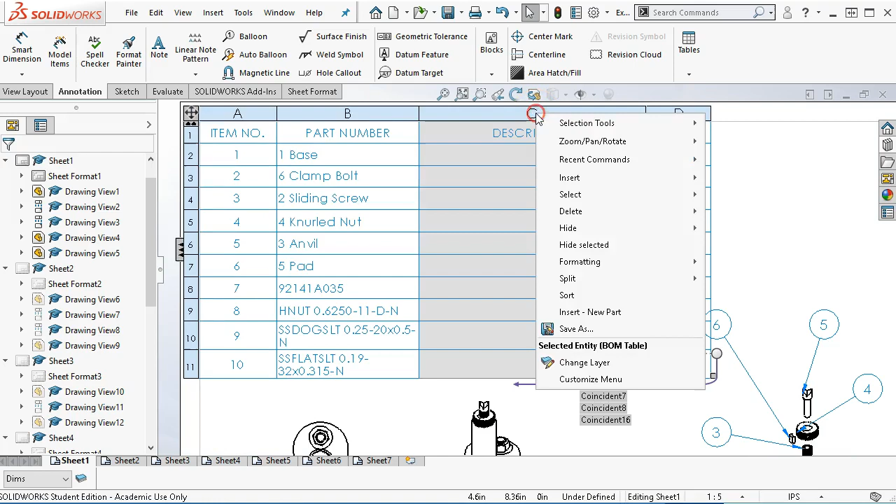Yeah, we're probably, as an extreme, let's go down to 1 to 5. Now it's not very visible on the views, but we'll auto balloon, and that doesn't look terrible. I would probably try to line up on one side, and that looks probably worse. So let's just stay with the circular or the square. Okay, and since everything else was the 1/5, we do have a little room. I'm going to delete. So highlighting the column, right-clicking, and then I lost something there. So let's zoom up on it, and delete, and column, and that'll open up a little more room. All right, so 1/5 is a little small. Let's bring that one back up to 1/2 as the usable.

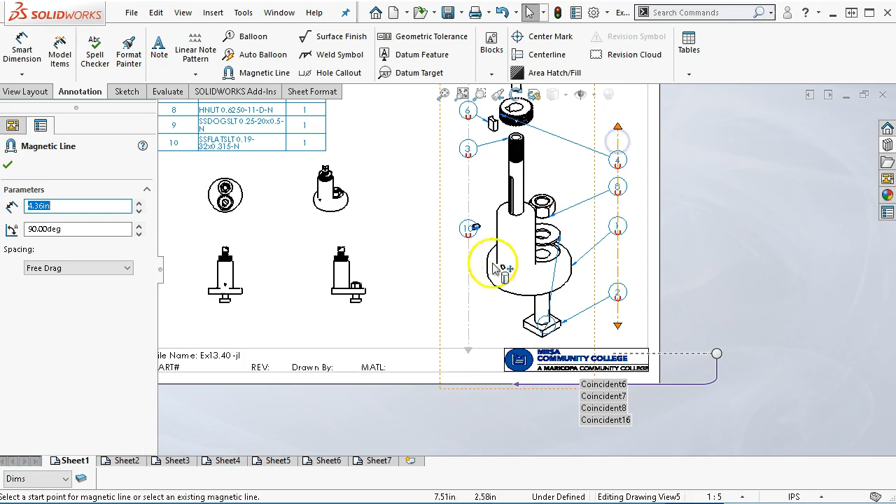Oh, that's neat. Referring to a view. Sort of. Not quite sure about that. We're going to stretch the magnetic line, add the number 5 to it. Yeah, I don't know if that's a video anomaly or if it's actually trying to do that. 8 can come over here. And we'll pull those out. And we'll make a little more room for the set screw. Since 8's out of the way, we'll shorten that up. Alright, so the magnetic lines just give me the ability to kind of work with these and keep them grouped together as I align them.

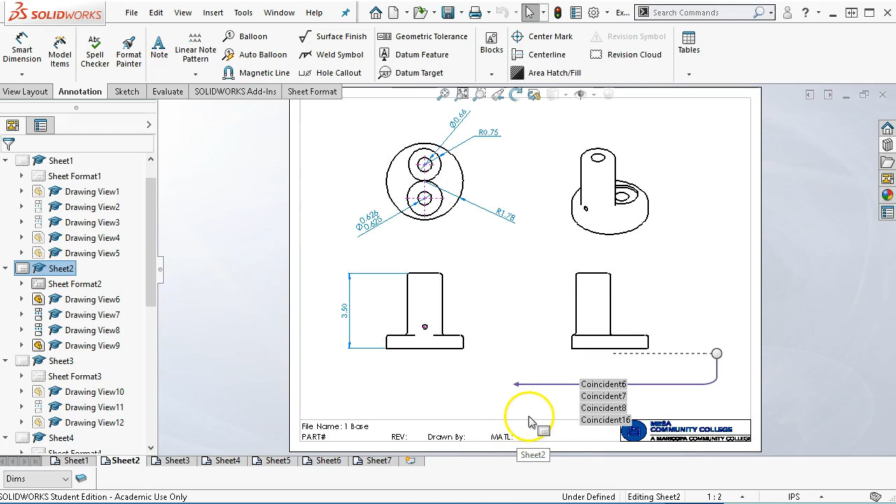Alright, so another couple passes, we'd have a detailed document for this item. I would go back to each of the parts then and add for the geometry. Since I added it from the assembly, I'll say that should have written it back to the part. Let's double check. So material, plain carbon steel, and it may be that I haven't opened up properties, or there was the issue, I have not activated the custom properties. Right, so I do have to open each of these up, give it a part number. Once I apply and then save, then I can rebuild and I'll at least see the information that's there. So we have another couple passes on these. We're going to call this one good and move on to 1341.